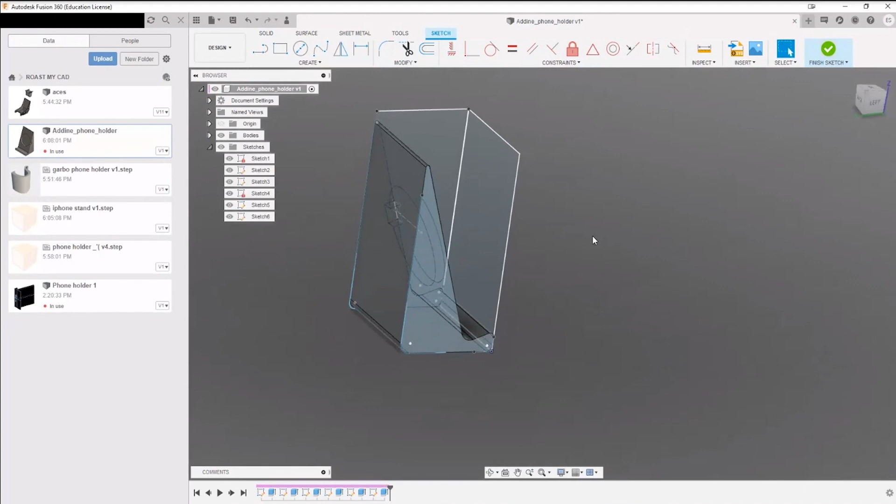Now, I'm not actually going to critique what the sketches are for, because everyone's got their own frame of reference and everything.

Right, well, this would be now, guys. Do you think where do you think we need to put a constraint if I'm able to move this one across? So we've got all the radii constrained. So there's two options I can see off the bat here.

Where do you think those would be? Anyone can just call it out. In fact, could probably see three.

The top one. So we could do something in this corner. No, the bottom by the angle. By the angle, this one, yeah. Yeah, yeah, okay, so yeah, there's one thing we can definitely do here. We can probably set this distance, right?

Actually, so we could probably set this distance.

This is probably a really stupid question, but what's the point of constraining stuff? Look how if I'm clicking this line and dragging it around, right? Obviously, I don't want this to happen.

Okay, so when you constrain it, you make sure that you can build out this entire sketch. If you were to draw it on a piece of paper, right? All the angles, all the radii, all of the lengths, such that you'll be able to construct this on a piece of paper.

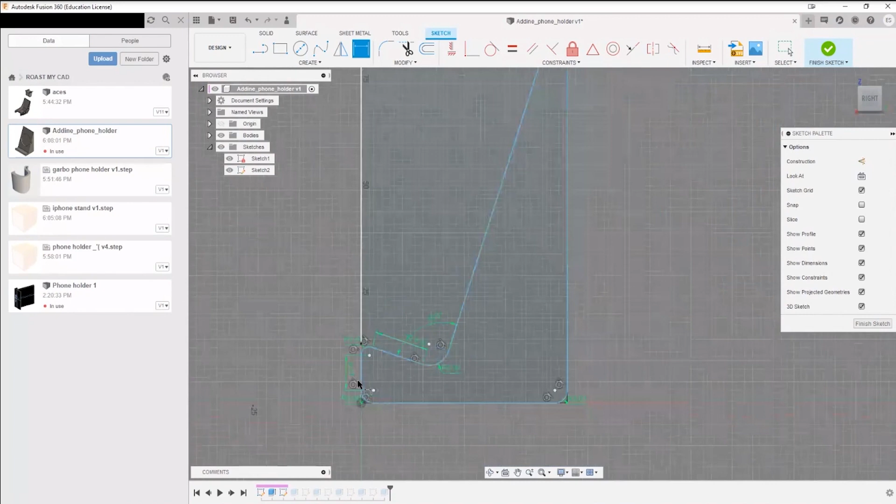So one thing that you would need to do is run constraints for these different points. Now, you want a height between these guys. All right, so that's no longer moving. See, so those constraints that need to be placed all over.

Now, this is one thing that I may have mentioned in the first or second session, is that adding fillets inside of the sketch, if you absolutely need to, do it. The thing is that it tends to remove any endpoints for lines.

So what I mean is, when Adine did this, he probably did something like this, and then something like this, and then he probably constrained it to the origin. So let's go from here to there. Yeah, that was the first point.

This was the second constraint. And then this was the third constraint, right? And then we can check. Oh, yeah, so this line's got to be coincident.

Switch on. Right, so it's got to be coincident or collinear with that point.

Yeah, see, now it's turned white. Now I cannot move it. So I'm clicking it, I'm moving it, it's not going anywhere.

So we know that this line is going to be collinear along this y-axis to this point over here. It's 84.818 away, 52, and then whatever this gibberish number is, okay?

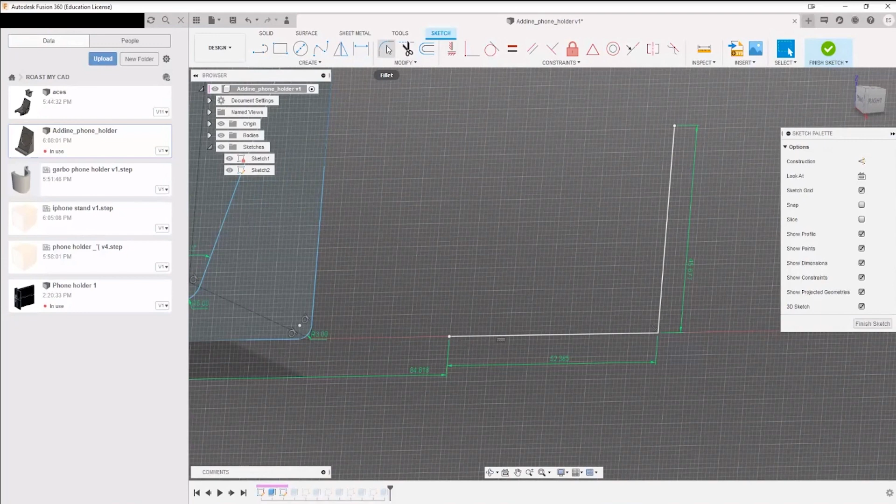So this is constraint. Now there's one little glitch, I wouldn't even say it's a glitch, it's just the way Fusion does things, right? If you go to fillet and select this corner, select 11 millimeters, if you hadn't constrained it previously, this wouldn't constrain either, right?

So one good way would be, okay, so we've got 3, 2, 3, and 1. What I would recommend is when doing a design like this, let's just say I'm going to delete that there. I'm just going to do these two corners. There's a neat little tool over here.

It's called extend. So if you go under modify, extend, what it's going to do is extend the same line. So you don't need to create a new line from this point. Because points do get taken into account, and if you start to extrude, it's going to create a whole mess of things.

So try to always have a single uninterrupted line going back and forth. Now I'm going to turn the bodies off here.

All right, so we've got these two things. Now there's another tool, it's called the trim tool, so you can remove the excess bits that you've extended. Okay, so now you've got these two.

You know this line is constrained. You know that we need to put an angle between these two. So a good way to go about it, I'm going to remove most of these angles here.

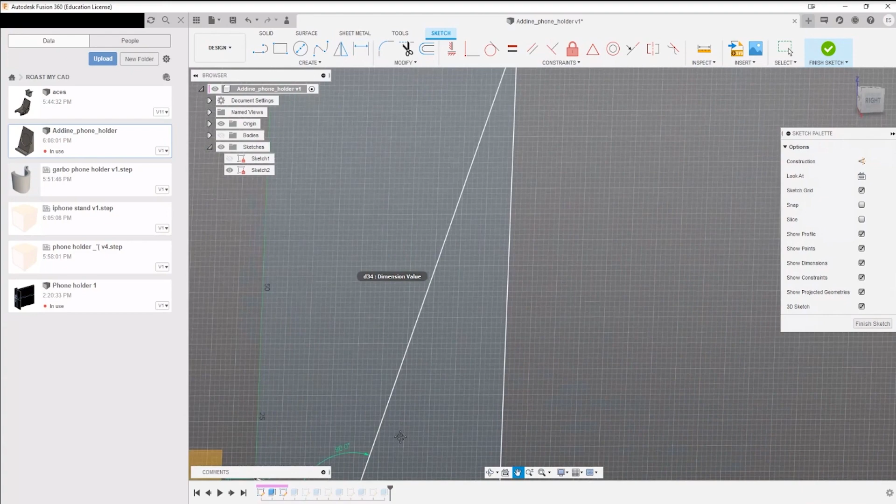Now, the reason why this is constrained is probably because there was a previous block that Adine made out here, which is taking it as reference. But if you didn't, your next step would have to be to create the constraints here around this angle, around this angle.

Now, once you've created these constraints, you can go around putting fillets already within the sketch. So make sure that your overall profile is all set out before you start putting the fillets.

Okay, we need to make that 1 millimeter. And I think that was 3 millimeters. No, that's 2, and then that's 2 there as well.

Okay, so that's all constrained, and now I can no longer move this part around. It's all nicely constrained, and you're not going to have any shifting issues.

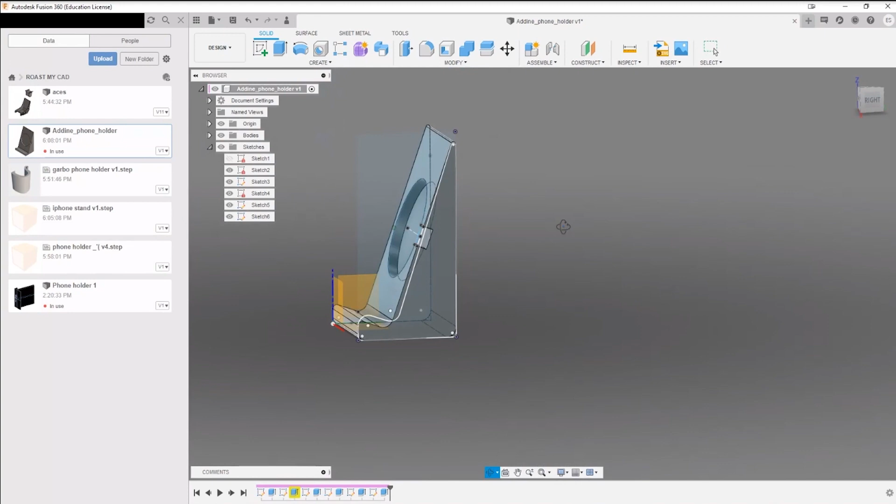So once we put this body back, what we can do is create a new block. So let's say, let's take the distance between there, so it's 50 mil and 60, 50 by 60.

And we'll actually use that point as a reference as well, so you can create references in between different sketches. So for example, if I've got everything constrained in this sketch, it's quite reliable, I can use that as a reference in another one that's right next to it.

Yeah, so we'll join that one up. Now, I can either cut through this one or just select the intersect Boolean here, and that's going to leave this shape. All right, so this is one approach.

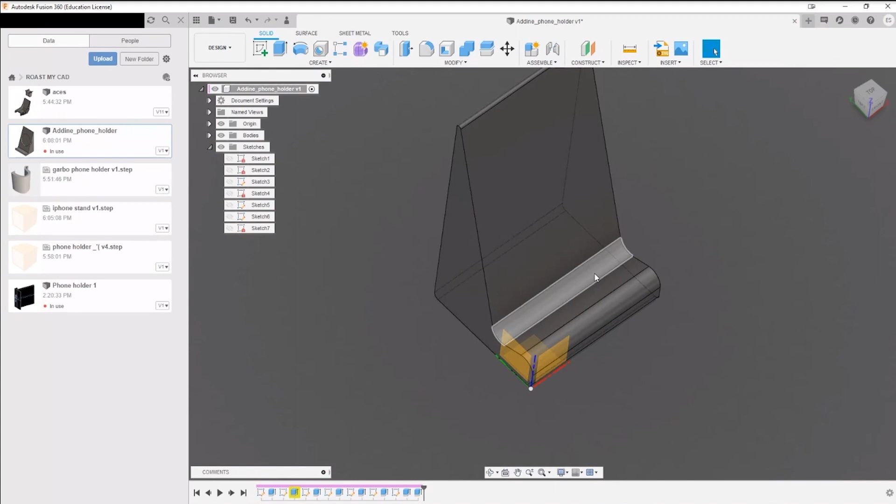Another approach would be to actually leave the sharp angles over here and then create the fillets using this tool instead. I find that in my workflow that tends to be faster and more applicable, but then again, to each their own, it depends on what you're doing. But I found that that also shows fairly good results.

Okay, now next thing you need to do, you wanted to create the circle. Now, again, this is one thing that you always need to pay attention to, constraining. So we've created a certain circle, but this circle isn't fixed in space, right?

If you're working with different people on the same project, chances are, or your hand might twitch or something, you might move this off. Maybe not that much, but an entire millimeter. But a millimeter is going to put it out of alignment with, say, another component that has to fit inside of it. So again, it's always good to find where the origin of this certain plane is.

We can say this is here, and then just marry that up to that particular component. Okay, now I know it's constrained. There's another way to do this. In fact, I'm going to remove these guys.

If you want it to be positioned in the middle of this cube, we know that this was 60 millimeters. Well, we're going to put that to 30, and then do is actually inspect, check that this is perfectly centered. Okay, so that's about, say, 90.

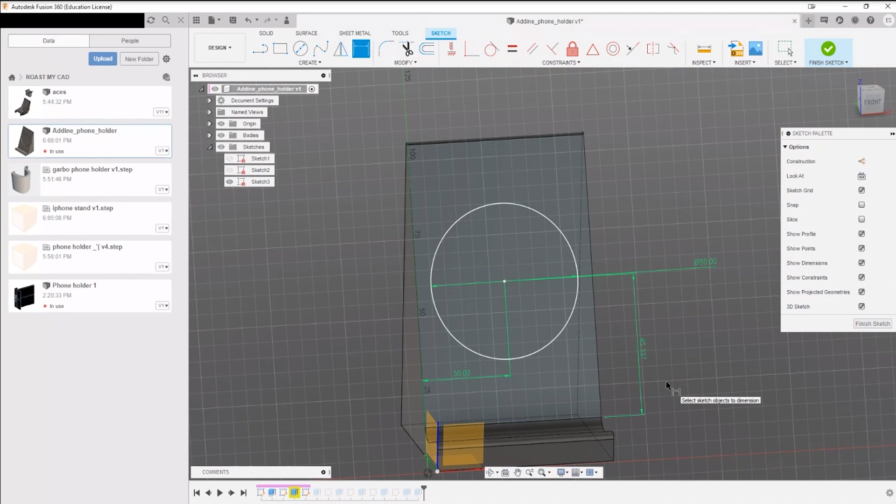If the circle needs to be at a particular height, you probably have calipers to measure against your phone. But say if you want it to be in the middle of this segment, between the fillet there and the start of the fillet there, this would be one way you can do it. Okay, there we are, so that's perfectly centered.

Finish that sketch. That's constrained, so that's not going anywhere. And then we can cut in like this.

Wonderful. Now the same situation is going to happen over here. You probably have a sketch. No? Okay, you don't have a sketch for an opening. So to create this opening there's two ways. You can either create a square and another line and use that to sweep it through, or you can just create another sketch on this surface, line it up.

This line segment probably has a midpoint somewhere, and this is what CAD is very good for in terms of computing it, so it'll find that midpoint. So you can draw that 90-degree line. That can be your construction line. You know that this is 5 millimeters deep.

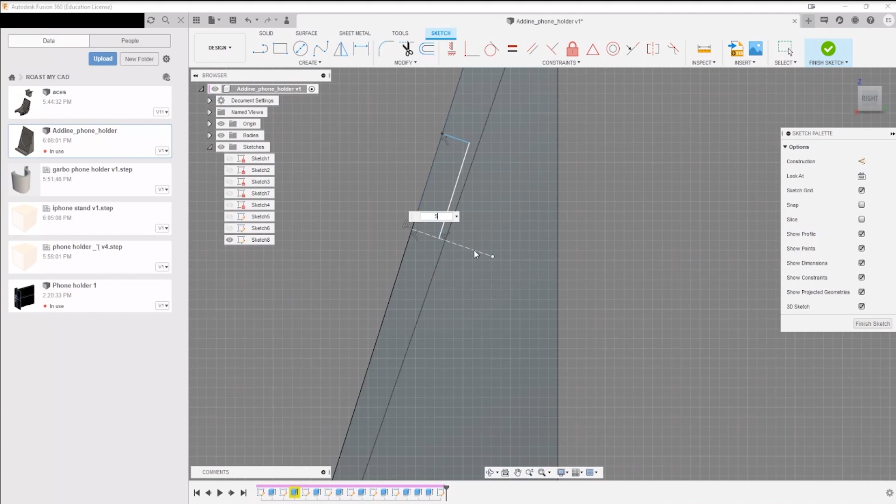So you can do something like this, and then set the distance of this line to the surface. Okay, we set it to 5 mil there.

So now we want to make this opening a little bit larger. Rather than copying - I mean you can draw this out again, but there's an easier way to do it, and that's just to mirror it across. So select the objects that you want to mirror over here, select the line, and that's all done.

A quick way to get rid of the feature - you can just delete that. Create a new sketch plane.

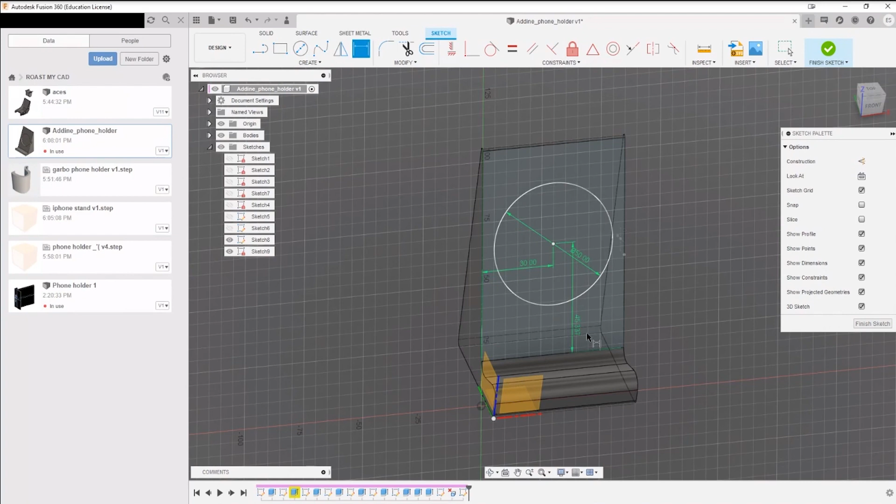I believe that was about 60 mil, and we're going to do the same thing. That was the old measurements, divided by 2. Okay, that's all constrained.

Brilliant, all right, and now we can just cut into there, and we've got the same result.

If we're 3D printing, obviously based off last session, there's 2 ways we could print it. You can happily print it standing up the way it is, or you can turn it on its side, like this. So most of you, what would you choose, which orientation, and why?

Can you tell me? Just shout it out. Cut out upwards on its back. Yeah, cut out upwards on its back. Any reason why you would want to do it that way? Because you haven't got any overhang otherwise, apart from maybe the little lip on the bottom to hold the phone. Yeah, absolutely. So one way you could do this.

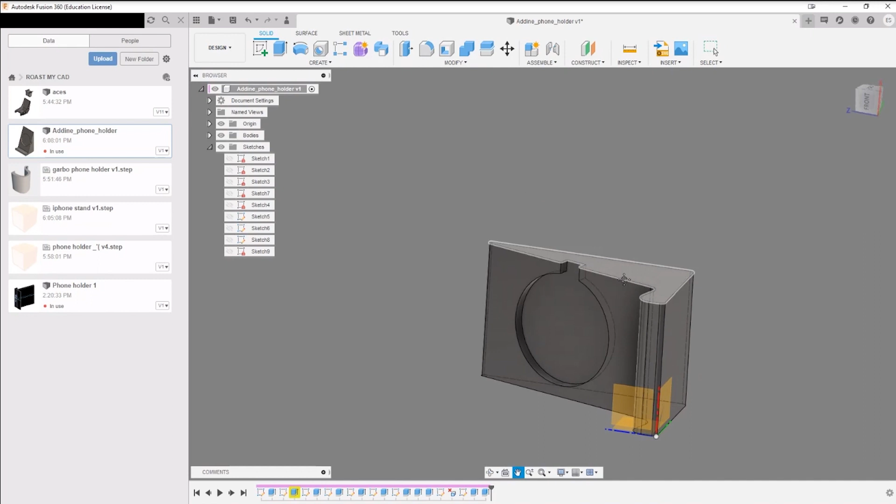So one way you could do this is put it on its side like this. If you actually throw this into Cura, the first layer that's going to go down will go down quite quickly. You've got a lot more stiffness, because if anything this thing's going to be bending around this axis, right? So you want this to be an entire singular shape.

You're going to get much sharper corners over here because the extruder is going to have effectively no layer height resolution limit in this case, in the XY plane on the print bed. So it'll make these corners quite sharp as well. So those will turn out quite nicely.

And like Robert said, you don't have any overhangs over here. So it's effectively skipping this keystone region. Just to say, I meant the main back, the big surface. Oh, that way the entire cut out is facing upwards.

Oh, so you want to do it like this as well? Yeah, that could be one way. In fact, the printer will handle a slight overhang like this. So that could be another way of doing it.

So again, this is quite a robust shape. You can do it in most ways - some ways it'll go a little faster, others a little slower. But it's really up to you in terms of where you want the stresses to go.

All right, what do you give it out of 10? Well, the balance looks off. That's my main concern - like, you put the phone on, it looks like it's going to fall over backwards.

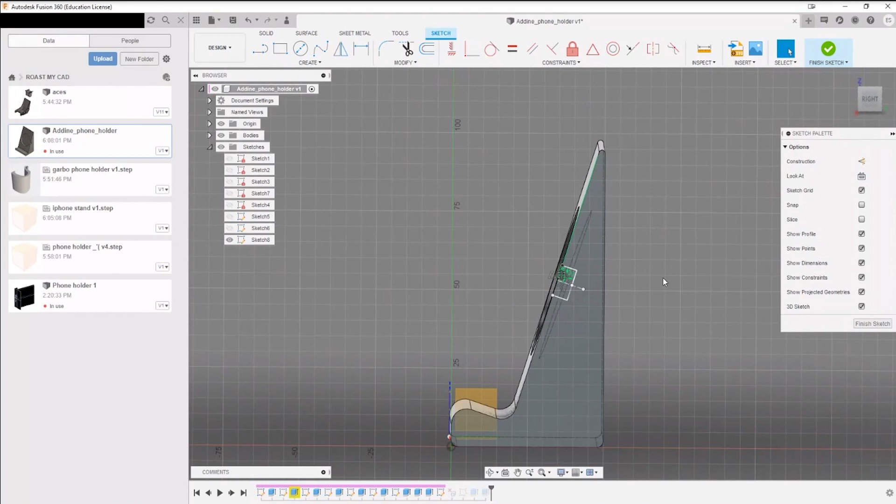I'd argue that's okay, but you have to keep in mind it's going to be printed out of PLA, and modern phones are heavy. It's top-heavy, it's got a high center of gravity, but it's got enough base down, it should be okay. Yeah, but if anything, it needs to be a little bit taller and a little bit further out. Engineering 101.

How do you establish if this is more likely to tip? It's a little clue - this has to do with center of gravity. You want the centers of gravity to align. So the center of gravity of the phone is probably somewhere here, depending on how long your iPhone is - probably 13, 14, 15 centimeters, so about 6 or 7 centimeters up.

Yeah, this is 86, so chances are the center of gravity is here. So the center of mass for this product would have to be somewhere, as far back as possible, so it's not as easy to tip over.

Now, one thing we can do is check the center of mass on this object - okay, center of mass is way down here. Do you think this would be at risk of tipping over? Because effectively your rotation point is going to be about the center of mass for this. Well, yeah, because the majority of the weight of the phone is past the halfway point, and then it's past the center of mass as well.

All right, we've got a lot of designs to rate. I'm going to try to go quickly through the other ones. Will we give this a 7, 6.5, 7? I could agree with 6 for that - lack of creativity.

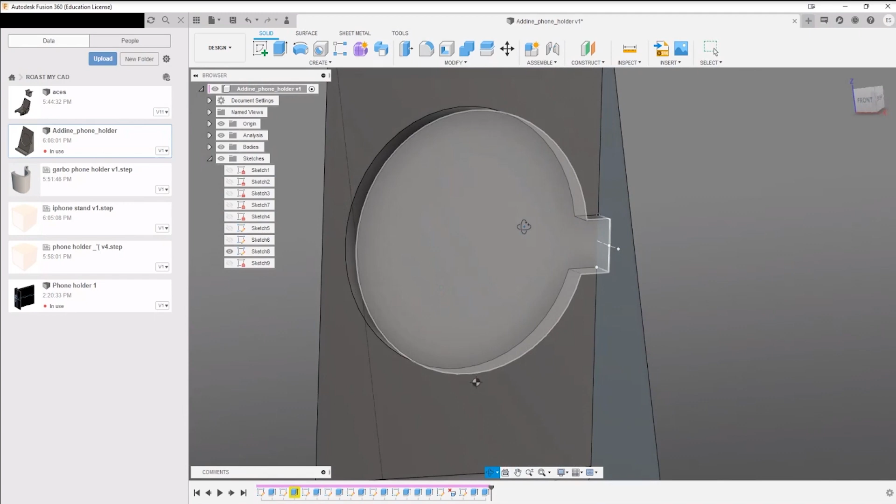All right, I'm happy with that. There's one other thing I probably missed - this gap needs to be directly in the center. So I'm going to use this as a little learning opportunity on how you can use one sketch to reference another. I'm going to remove this one real quick, and you can actually remove it too. What's up? Okay, wait, for creativity, right?

So if I switch off the body, this is constrained in space - it's not going to go anywhere, but you can use it to reference it. This becomes very, very useful as you go along. So as I mentioned in the first session, do have a look at these features - they'll allow you to do some really insane stuff in CAD. I'll even show you later, you can effectively create an entire underground tube system in terms of projections using that method. I'll show you in a minute what I mean.

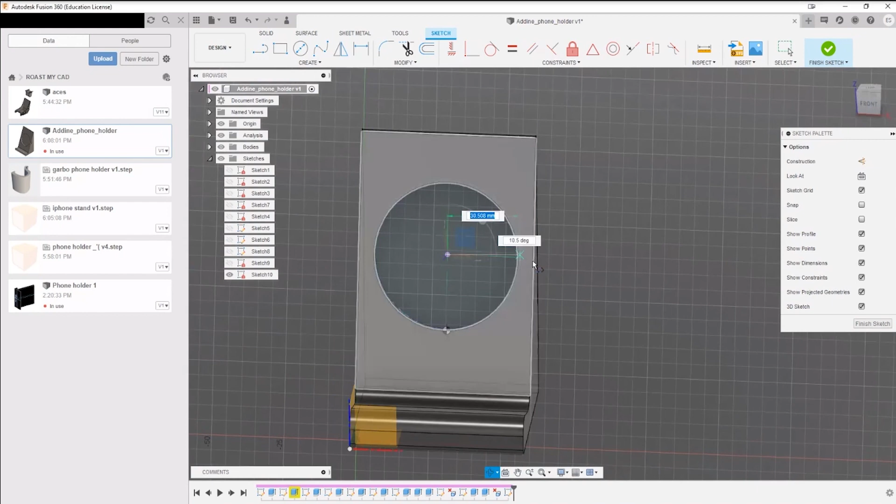So once you've selected that, just create a line out just along here, and we'll turn that into a construction line. Now you can go even crazier with this - actually, no, we'll keep it at that.

So once you've done that and create a new sketch, you can use project again and include this line. Now, because this line intersects this plane, it's going to leave a point, okay - a point which you can reference to create a third construction line, perfectly aligned with the center of that circle. Now you can go ahead and find other ways to do this.

This is just the first thing that came to the top of my head to describe these functions, but it shows you how useful it is, and once you get more complex shapes, how you can navigate using different planes and axes to get to where you need to be to make a second sketch.

We'll go with 7. Mirror that across - where's it gone?

Okay, punch that through. Now that's centered. All right, cool. So 6.5, 7. Bonus points for creativity and for multi-component ones. I mentioned this in the last one, but other than that, looks good. That's pretty sound, that'll print well.

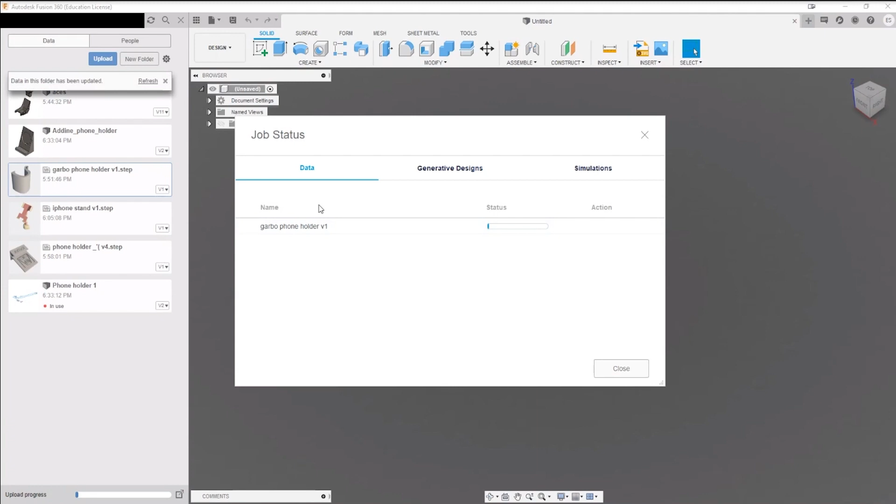That's painful, you're gonna wait a while to see my amazing, beautiful work. All right, so you've gotten it to work. Oh sweet, okay, that one's opened up as well apparently. Oh no.

Okay, create fusion things. Oh right, okay, this is what I've literally just generated, a fusion design from this.

Now this is going to be quite cool, because you'll see how you're able to work with step files and how much you can interact with them. I don't see your sketches, but I think right now, off Dean's example, I've been able to get across the importance of constraining your sketches and making sure they don't shift around, and what happens when they're unconstrained. You see the lines, they just go all over the place, and that's going to create problems down the road for your design. So everyone's got that, we're not going to cover that anymore. Now we're just going to look at the actual design.

Right, so definitely I can see extensive use of splines here. I do have one question: which way is up? Is it meant to be like this, and then the phone sits in there? Yes, okay, wonderful.

All right, two holes, that's for cabling. Yeah, for cabling, or if you're not putting your phone there, it's just like a cute little elephant, or it should be, like. I see what you're going for.

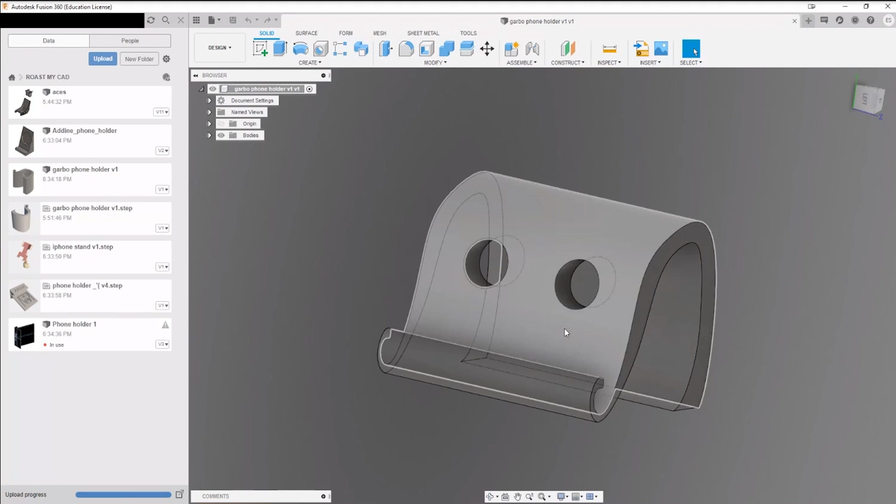But we'll see how it stacks up against dimensioning. The width and depth of the trunk where the phone sits, has that been measured and calculated to hold a phone, or is it just eyeballed? No, an offset should have been used, it's just eyeballed. I was just relearning all of this stuff earlier today, so quick learning.

Awesome, all right, okay so I see 140 millimeters, so I'm guessing the phone sits sideways in here. Yeah, okay, all right, very nice. We're not multi-component, so I'm gonna have to slash you on that one. Fine, yeah.

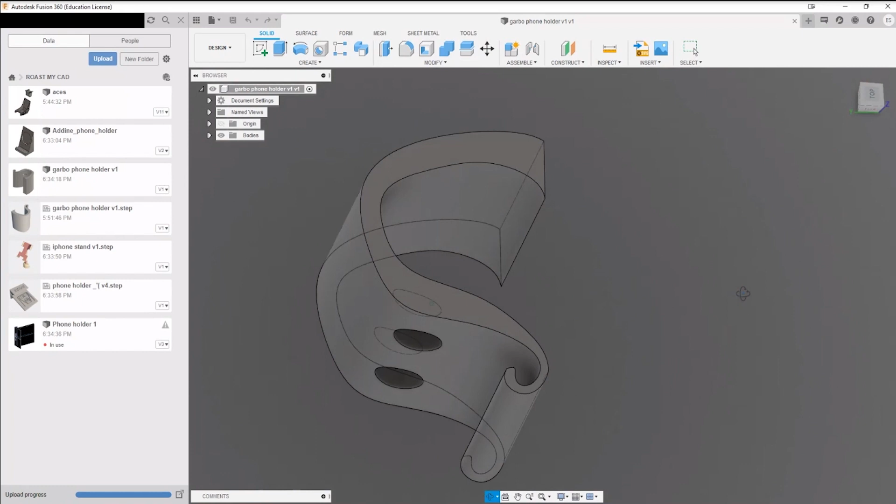Right now, in terms of printing, which way would you print this? The way that's kind of with the trunk on the side, like that, just on its side. Yeah, okay, so these circles, the printer would normally do that. You might get some rough edges up here on the slight patch, but generally it'll be able to do that. That's not a problem.

The only qualm I would have maybe is this corner for printing. So this edge, because it's technically going down to an infinitely small point, this is where I'll show you how you can interact with step files. You can create a fillet, you can select the size, and we can go, say, 1 millimeter, and it will do that. Now, when you're working with step files, you'll see it might create a few artifacts.

See that bit right there? That little corner? So if you actually see something weird sticking out, ignore it. Just turn the other way, don't listen to Ben.

If it looks weird, it probably is. Okay, so let's see what we can do about it. Control Z, undo—it exists for a reason. So you can try actually deleting it and seeing what happens.

Oh right, okay, so that's been resurfaced. That's no longer a problem. Might have been a glitch, but it's gotten rid of that corner.

If we try to go and delete that edge again—no, it doesn't let you delete it. Okay, so actually it gave me a warning, can't delete individual faces. So apparently this was a second face that was created on top.

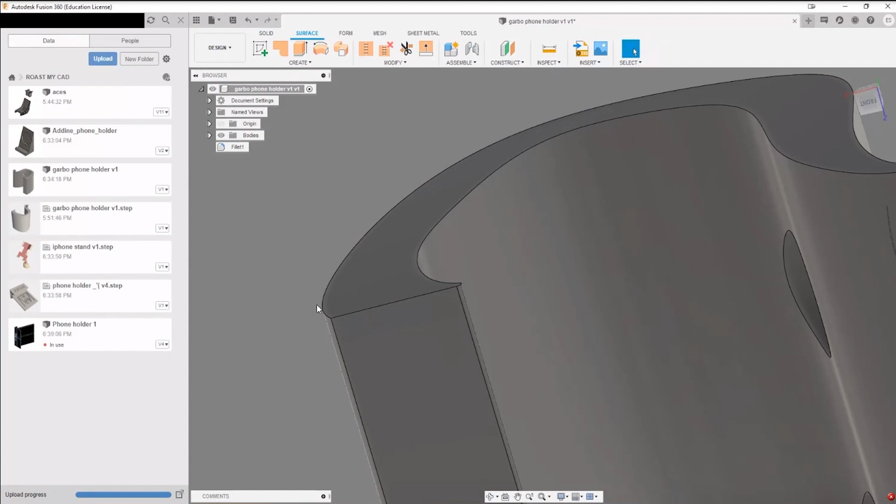I'm guessing because of the way that was done—were you using the surface form? Yeah, and then stitch it? Yeah, okay cool. So it seems you've created two surfaces: you've stitched one onto the rest of the body, and one was left overlaid. That's why we got the edge—it was literally lying on top here with a corner out. So we just removed that duplicate edge.

Maybe it's worth trying to see if there's a second one. Ah, no, all right, okay.

Sorry, one second—I know we skipped past this, but Pavel is trying to get his design in. What's the method if he can't do it? Tell him—is he watching now? Pavel, are you watching? Yeah.

All right, so go to File, go to Export, and for the type of file, click the dropdown and select Step—just this one. Select Step, then select your directory, wherever you want it to download to. I'll put it in my Downloads folder and select Export.

Once you've done that, go to your Fusion client. You would have seen if you've been added to Roast My CAD. If it shows up in the web client, hit Upload and drop it there. If it doesn't work that way, just drop it into the chat and I'll upload it myself, since I think you said the upload was whited out. Just make sure you export it as a step file.

Yep, okay cool. All right, so you create the surfaces—are these stitched together? Yeah, these are stitched together. All right, cool. Guys, what should we give it?

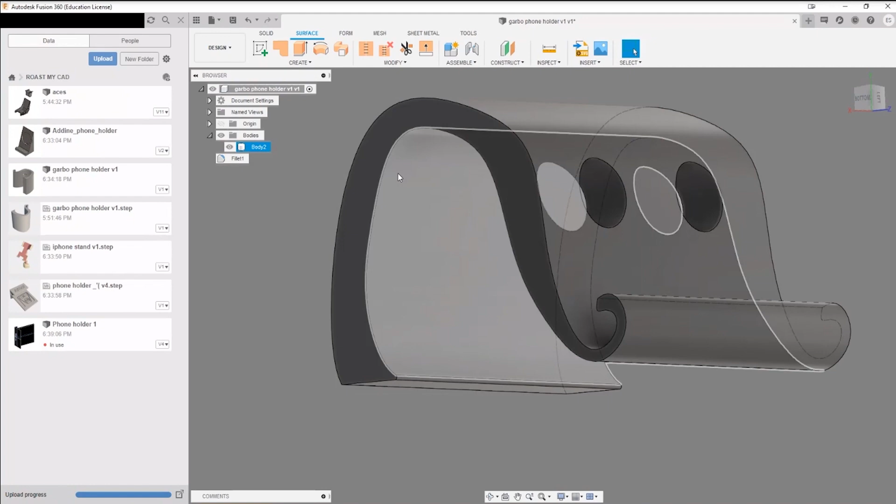Since we gave Addine's a 6.5 and a 7, we'll go with 7.5 for creativity and technical. Definitely nice job working with surfaces and figuring that out—it's not multi-component, but it's multi-method. Should we give that an 8? Yeah, good use of curves as well—stops warping when printing because you've got no right angles. I think an offset would have made that look a little neater, but otherwise yeah, we'll go with 8 on this one.

Thank you, all right, no worries. We'll say that. Right, let's go. Someone is typing furiously on the laptop.

Now I might need to adjust the scaling—I might need to put this out of 15 instead of out of 10 if there's exceptional ones coming up. So we're going to change the scaling as we go. Out of 12. It's moving out of 12.

Okay, so 10 is fully met expectations, and anything above that is exceeded expectations. I think you have done a 110% job—top scale.

Apparently in the military, when they assess you, it's on a scale of 1 out of 5, and 1 just means you're doing your job. That makes sense—why would you want to be below? It makes sense, but imagine just being an average student, it's like being a straight C student.

Avatar fan. Right, this is impressive. Yeah, a little bit of Avatar. Okay, yeah, I like this one.

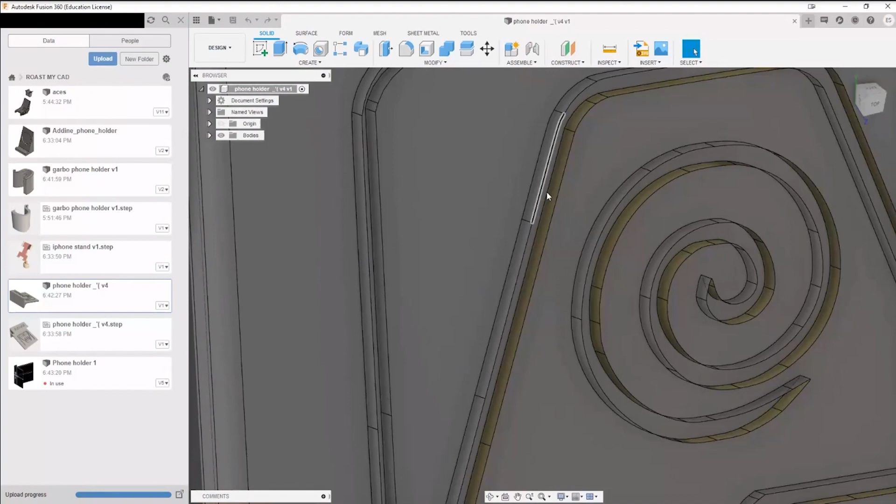Yeah, very trim. My only design concern would be maybe making this foot a bit longer, but good use of fillets—the print extruder is going to go around that quite easily. My only concern for printing here would be this is technically infinitely small and infinitely thin.

What's it called? Yeah, infinitely small plane. So right now we're going to see how to fix that.

So technically, this is right up there. You've done everything right with the lettering. The lettering's good. Can I just add, how are you planning to print this one?

Nah, I'm gonna be honest, I don't know how everyone was saying that. Everyone just kept on saying on the side, so I'm just gonna guess on the side. I mean, it's the only flat surface that would avoid using support. But then you're going to have problems with the letters, the text or the shapes.

So I suppose straight up might work. It's beautiful, okay, depending on- not sure if it's printable. But what's the workaround around that?

Okay, sure, you might not be able to print it, or you might need to put support here. And generally, I try to avoid using supports because they tend to extend your print time. They mess up, sometimes they fall over, and then they leave waste material. They're an absolute pain to get off, and they leave a rough edge on the bottom here. So this is going to be all mangled at the bottom. That's just how it runs.

So what would be the workaround for this? Have the front as a modular piece, so you can then screw in different parts for bigger phones or smaller phones as well. No, you can do that. Okay, but someone else apart from Rob. Can you tell Rob?

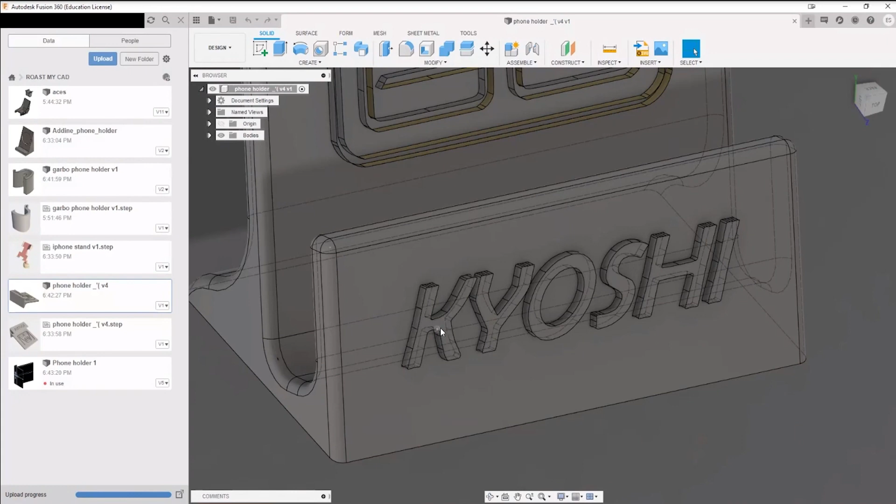This was probably from the first or second session, and actually in this particular case the solution is so easy, and you can 3D print it as well. Just not in the obvious sense.

Well, you can turn this into a multi-component. So technically, let's go with, we can split the body. Use that as the splitting face. Do that, and now you've got... so now you've got the letters separately.

So what you can do is you can print the letters separately. V is the hotkey for visibility, and you can print this separately, and you can actually glue these guys on. So you could print the lettering on their back, so the extruder will be running top to bottom like this. You'll get very, very neat letters. You won't need any supports, like in the S or the O, to create a floating piece, which actually, once I get to Luke's design, you'll see what I mean.

You won't get any of these floaty bits, and then you can just happily glue it on. Like I said, nothing needs to be printed as one single monolith piece, if you could figure out a way to assemble it properly. So that's always worth keeping in mind.

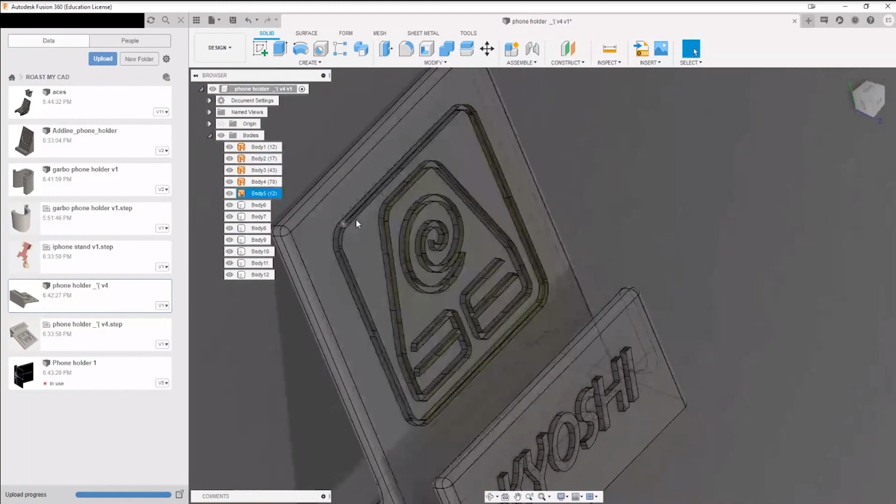Now that we've got this bit over here, we need to fix this extrusion. I believe you've gotten the line extruded and everything, but you need to make sure that this is an actual 3D volume that's being protruded out, because right now this is just infinitely thin. So a workaround to this one might be...

Okay, while we're at it, how to create groups. Right click on body, select create group, you can highlight all of these letters and then just drag and drop into there.

So what we're going to try to do is extend all of these surfaces, all of these edges. We're going to extend it into this body, and then we're going to cut and extend.

Actually, no, that will be the second method. The first method, we'll try to patch it over. So we'll create the patch tool, we create this volume. Perfect- no, that's not actually what we... no, okay, so it's not creating... all right, we'll move on to method number 2, since it'll be a bit faster.

I'm really appreciating the fan support for Avatar out here. Thank you.

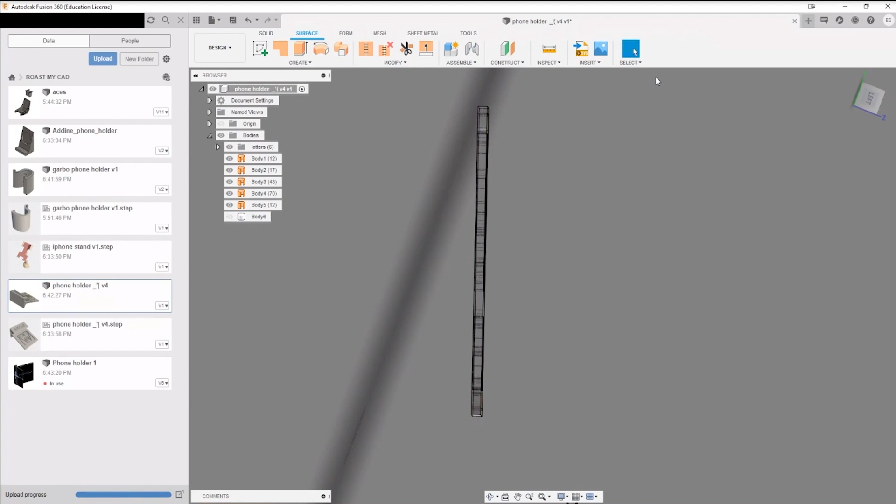All right, we'll just line this up so we can just select the... okay, so if you want to just select edges, there's the selection tool. You go to selection priority and select edge priority, and that's only going to select edges. All right, so that's...

While Ed's doing this, how did you actually design this? Did you just draw it out by hand, or did you import something? I imported it - I used the insert function and it came in as an SVG. It was hard since it all came as little separate pieces when I did that.

I'll give you extra points for actually going out and figuring out the functions, because that's pretty much the only way you can get around learning CAD. I thought this was drawn manually - I was amazed. Whoa, that's hard, I was trying to draw.

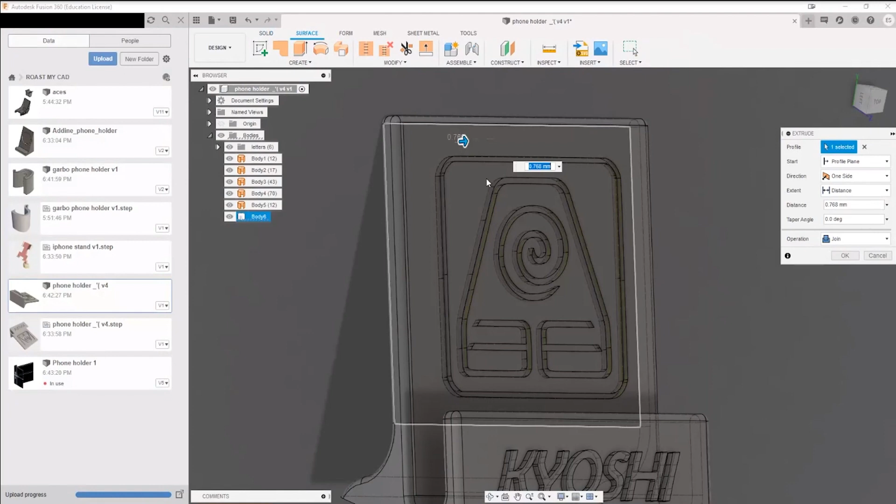Right, this is being a slight pain. What we can do is we're going to join all of that up. Now, if we...

What's going on, Ed? Well, what I'm trying to do is use these guys to split the face on this and then extrude it out so that we can close it up and actually make it printable. Because right now the issue is that this is a 2D plane. So what we're trying to do is select this and then select

the surface as a splitting tool, so it should create almost like a split line. It says no intersections between target and splitting tool, which is odd, unless you've got gaps somewhere. But this is going to be an interesting one because it'll show you how to troubleshoot - since it's one surface, technically it's a closed profile, so we shouldn't be getting issues like this.

We're going to run through a really good troubleshoot, because once you get dodgy models, you'll know how to debug them. Okay, what's the next thing we can try? Under inspect, there's a validate function.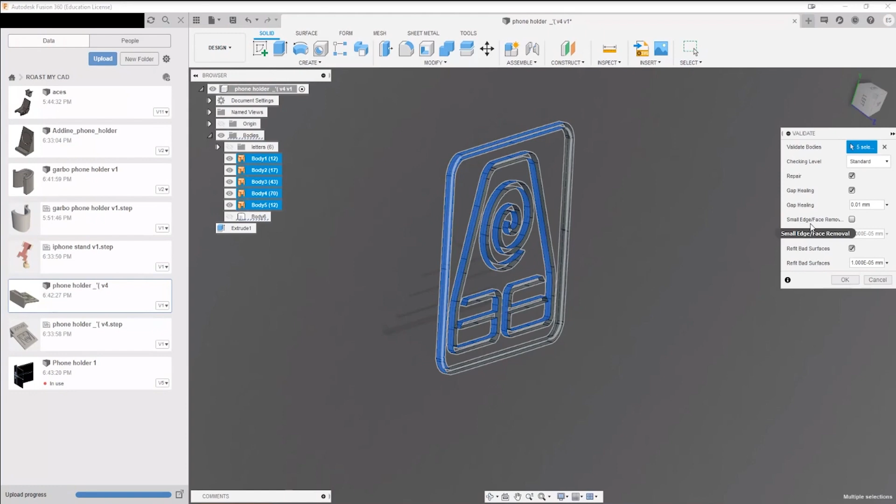So what it's going to do is check whether you've got any gaps - refit bad surfaces, small edge removal. Yeah, we can do that. Okay, that's sound, that's fine. We'll try that again now.

There's another split face option. So what we can do is we can actually split that face. Okay yeah, that's going to work.

Yeah, Dean, you're the one to blame for this. I'm going to have a whale of a time editing this out.

Two objects, so we're going to move that.

Just while Ed's doing this, who's made the phone stand and coloured it? I'm just seeing lots of names. That would be me, Danielle.

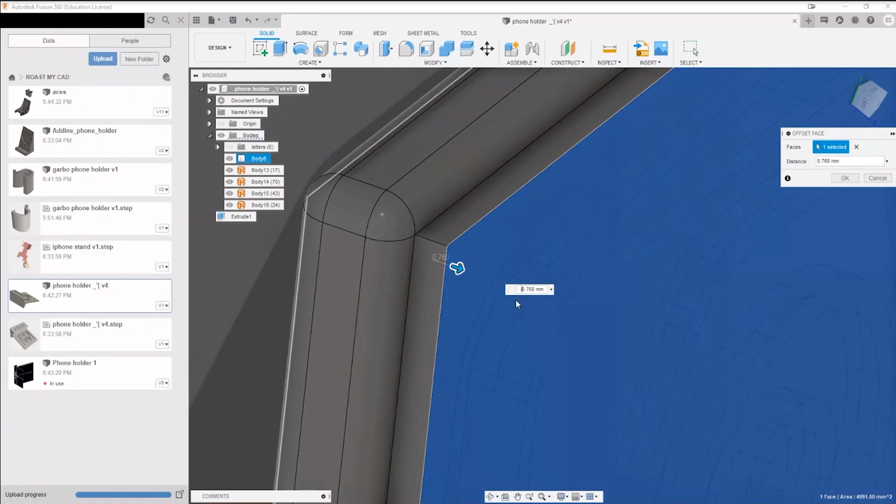I'm liking the use of appearance on that. Guess who inspired me? What inspired you, have a good look at it, try and guess. The problem is it's so small. Is it a windscreen mount, like for a sat nav? The colour scheme, I don't know - I just see brick coloured.

All right, let's make sure that Rob never goes into interior design.

Oh dear, right, so this is proving to be a challenge. You have challenged me with this - are you challenging me? If it makes you feel better, yeah, this was really hard for me to make. So this is redemption, right? Okay, so I feel less bad now.

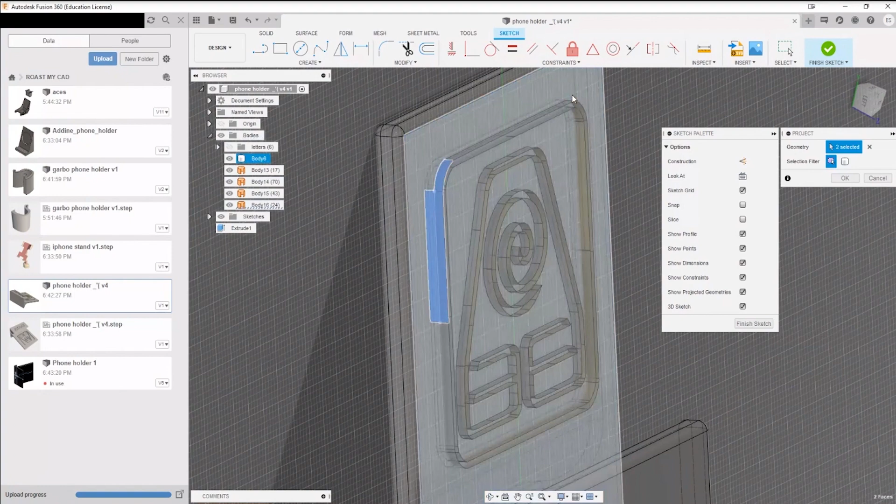So what we've tried here is to go into surface, and we're going to see if we can actually split the surface using this shape. We're going to create a sketch, using my favorite project tool - we can go project to surface. Actually no, we're just going to use the project tool, and what that's going to do is create a whole new surface around it. So let's just get rid of that body there.

You're going to find in CAD there's a lot of clicking - if you screw up, there's going to be a lot of clicking for you to get around this, but we'll get there, that's fine. In fact, what we're going to do is select the priority, selection filters, select all, click face priority, so this will go a little bit faster.

Can't you just do a click drag highlight? Yeah, unfortunately it's not letting me do that. Is it? No, it's not. You have to get the whole thing. No, I've tried to get the whole thing. All right, select all. There we go. No, for some reason it's not doing that.

All right, so we've finished that sketch, and then we can go back into the sketch and continue on with projecting the rest of the stuff in.

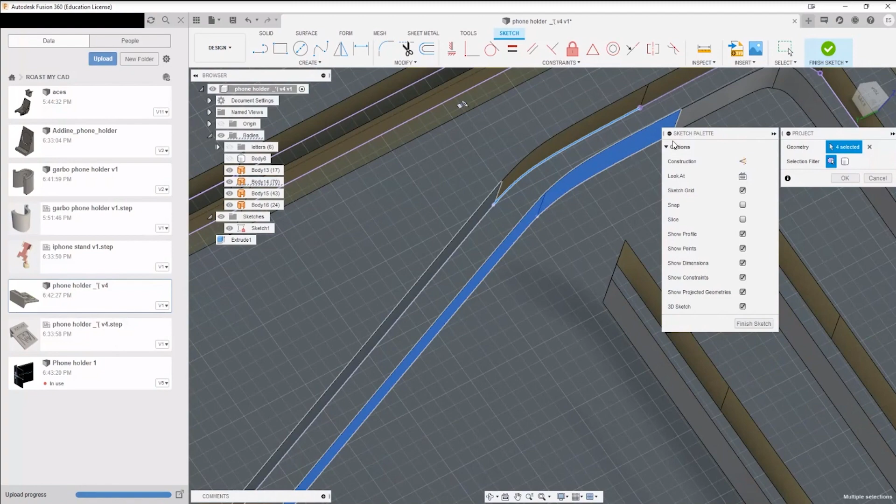Can you just select it from the menu, the browser menu, and highlight everything, like the bodies on your left? No, unfortunately you can't do that, because you need to select the individual elements, since a body is all of the elements put together. So we're talking about every single edge. Oh, I wish there was a shortcut for it.

We can try doing this again. No, let's run it. Create project. All right, I know this will definitely work once it's a closed profile, and you'll be able to just extrude that thing right out.

Can I ask, while Ed's going around clicking on every single face of the design, who's already made their mind up on what project they might be joining later? I'm pretty sure I might go into medical. Or does anyone have any questions about the projects while I'm here and distracting people?

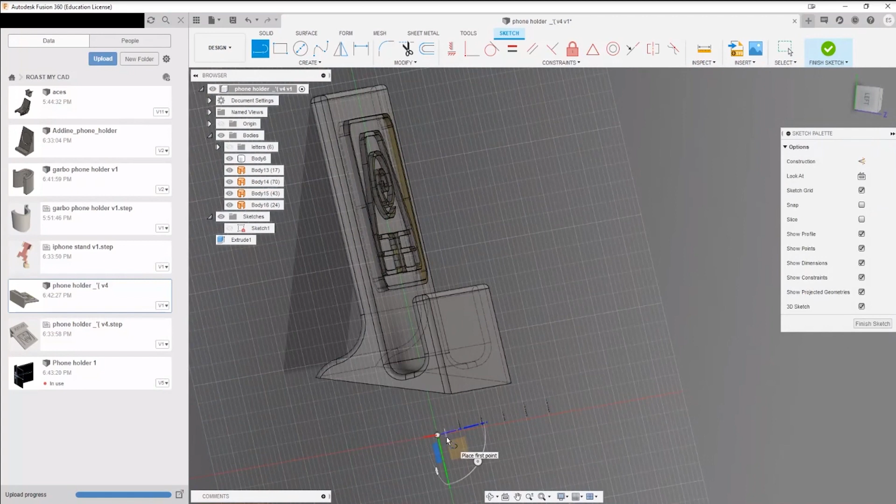Sorry, I can't really hear someone. I can't hear either. You're a jester for now then. Yeah, I'll just entertain. The best part is once I get fed up I can just save it and then start reprojecting again, so I don't suddenly click out and lose all the progress. Quick save, yeah honestly. Right.

But let's, I mean, we can extrude that thing out. How much was it supposed to be? Let's go 1.5 mil, that's fine. Doesn't it go in, not out? I mean, yeah, it depends which way, you can go both ways. We'll go out this time.

But that's not the point. I think once you can get this from projection to extrusion, you can do whatever you want with it. So the most important thing is to translate it from just being a surface into something where the body can exist, well, in the volumetric format.

Okay. Did I just switch on a section analysis on that? Oops.

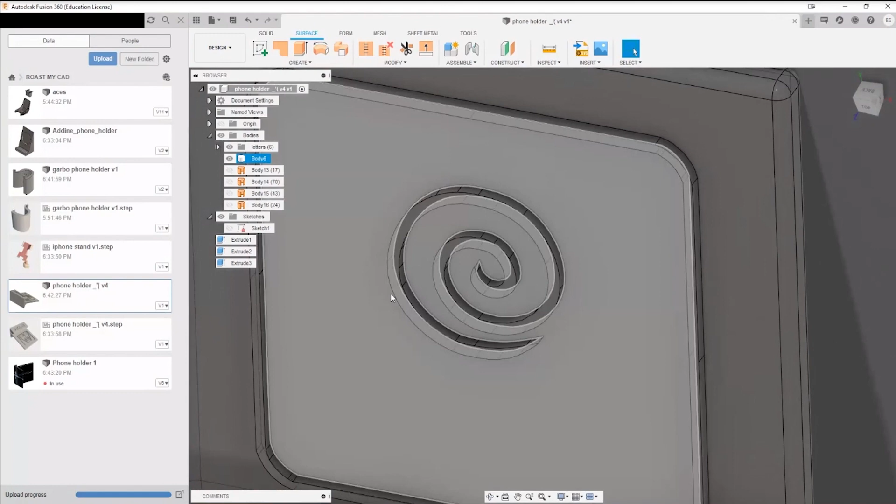Now, just for those who didn't get the gist, what happened was that—let's go with this surface, yeah. So what you see over here, this is an infinitely small 2D plane. You can see that, yeah. So even if I hit that, it only gives me a length, it doesn't even give me a thickness. And this was done using the surface form, okay, not the solid form. So what's going to happen is that it won't print, okay, it's paper thin, infinitely thin.

Now what I was doing is trying to translate this paper thin surface to something that can be extruded out, very much like this little embossed logo over here, or like the letters, right? You see they're sticking out. So one way to do that was to create a sketch.

You go into Edit Sketch, and what you do is go to Create, Project, and select the geometry that's going to be projected into the sketch, right? So you can hit a few of these lines, hit OK. If we turn that off, you see it creates these lines. Now what I've done is created a closed profile somewhere over here, like this round square and the swirly thing, and then you can use the extrude function to extrude it out, and it's actually part of the body.

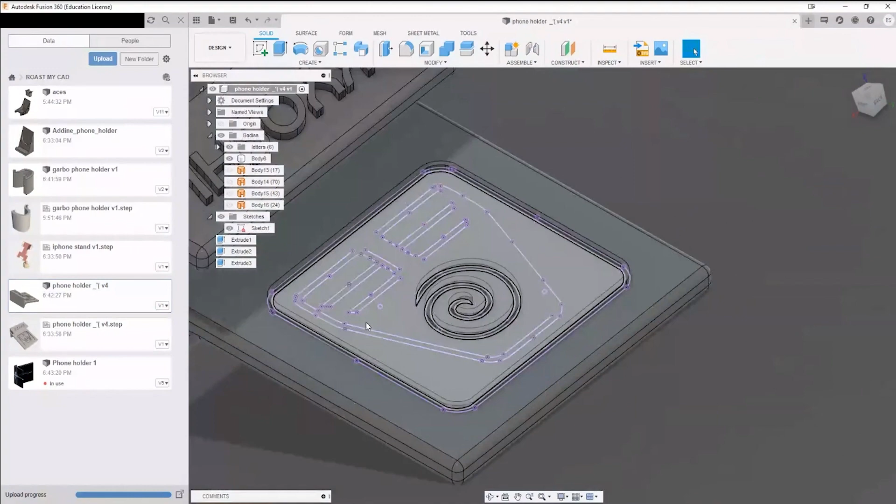All right, okay, so I'll save that. Now you know exactly how to translate it from 2D to a 3D surface in case you end up in a situation like that. Right, moving on.

Let's go to—I keep forgetting it's not. Need to create a fusion design. I'll create, we're gonna go to Luke's over here.

Yeah, literally the skeleton. All right, Luke, you're up next.

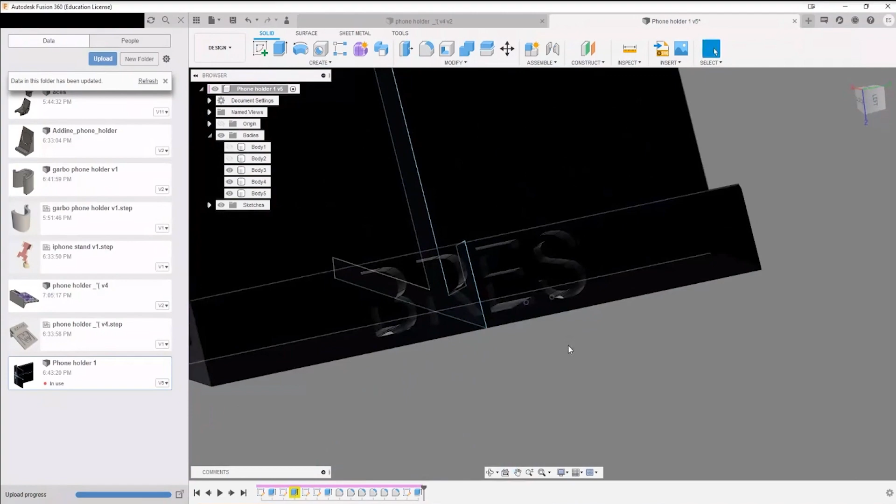I thought, well, how are they connected? Colored. Yeah, that's right. Well, how would you get the phone in there? Ah, right, no, you almost got me. You almost got me, right. So Luke has not figured out levitation. Damn it.

Okay, and there's a few artifacts over here, so it definitely needs a lot of debugging. I'm not sure. Ooh, yeah, definitely messy. Yeah, this is unforgivable. I'm sorry, man, I'm going to have to give you a 5 for this.

No problem. Right, right, the phone can't really sit in there either, can it? Because the letters get in the way of where the phone would be, right? Yeah, I'm thinking that, yeah, this groove, I'm guessing this is for the cable, but charger. Yeah, but this would need to be... If you hit Q as a hotkey, you can press pull that out, but I think it's bugged out to the point where it's not even.

Structurally speaking, the sharp angles, especially at the base where the back of the phone would be resting, that's not great either because it could break more easily. Unless you print on the sides and use the material's inherent strength. You're printing it upwards, that's not going to work.

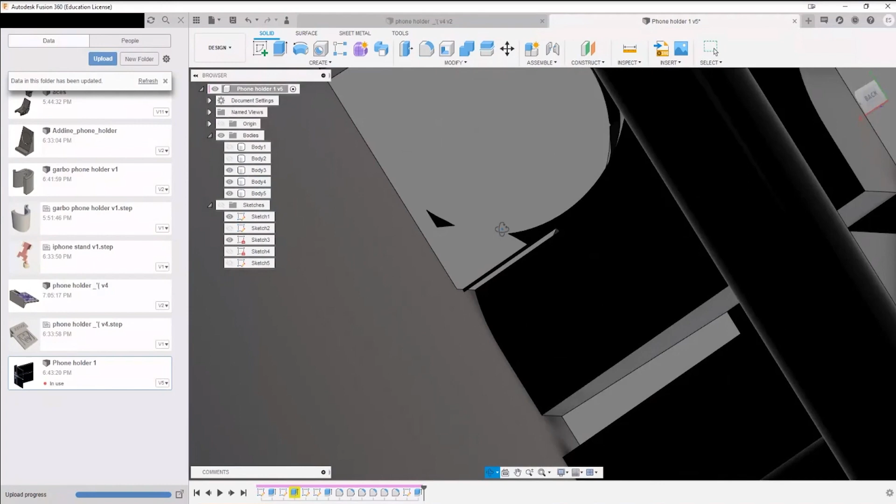Okay, so how can we improve this? Start again, do we get another take at this? I'm sorry, you get another take. I mean, stuff like this, you should have observed. But like I said, we're not going to bollock anyone for this stuff, this is all quite obvious.

So we're going to go and debug the technical bits, right? So if you want to create lettering, to start with, it would have probably been worth making the lettering go through only the front step of this bit. Oh wait, yeah, I know what you meant. I did it, yeah. So between here and here, well, here and here, yeah.

So, to leave some material, obviously, if you're going to create an opening for the charger port, it will be closer to this backrest, right here, or maybe leave a bit of material near this edge and a bit on this edge, and make it centered, just large enough for that cable to fit in. This needs to be larger because your cable, unless you have a 90-degree cable or some special one, your actual cord is going to be bent all the way down here, right?

So you won't be able to stand this up. So what I'm going to do is move these guys into here, and I'm going to do a quick little sketch based off your design. So let's go.

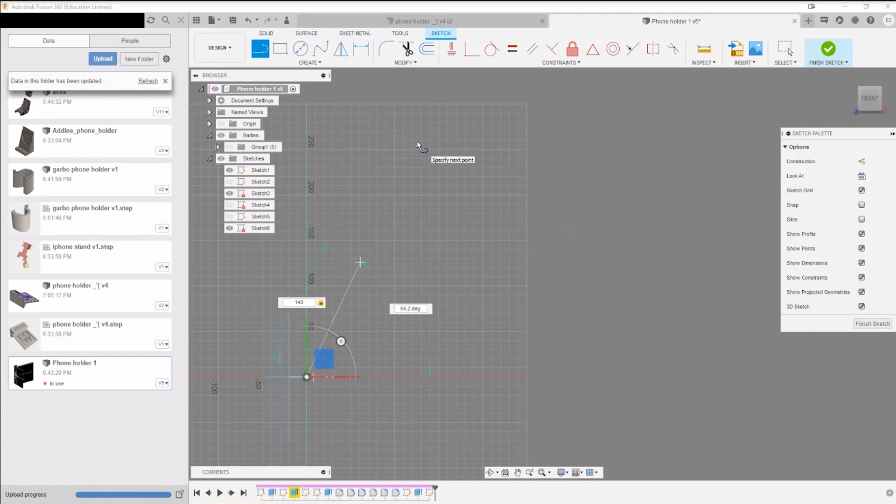Okay, so we go 140 mil up, and then depending on, let's pick an angle, let's go with 60, that just seems right.

Yeah, okay. Now, obviously, there's going to be a bit of overlap, so we're going to go to 150 mil. Actually, you know what?

Now, for 3D printing, 5 millimeters, depending on which orientation you're printing in. Let me just refresh that real quick. Oh cool, oh Pavel, you've managed to get it through. Nice, let me know how you did it after. I uploaded it in the chat, it's somewhere there before the meme. Okay.

Right, so we'll go with 5 mil, but technically, for PLA, if you go with 3 mil and actually print it in this plane, so on its side rather than standing up, 3 millimeter wall thickness is more than enough, it'll be very, very strong.

Right, so we'll put this line out here. Now, obviously, this needs to be constrained to this line, so we'll go around about there. We'll hit that trim button and get rid of the excess.

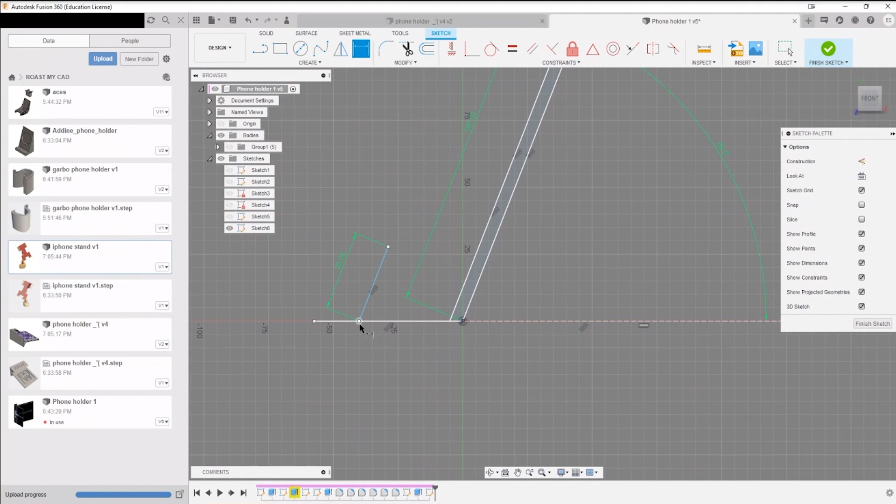Yeah, fair point. Do that with 30 mil, and then how thick is the phone? So if we've got a 5 mil gap, that's... let's go with 22 millimeters here.

Oh, that's weird. Okay, and then you can use that parallel constraint. You can just use it for days in this case. You don't even need to put any numbers around except for some distances.

And then we'll make this also 5 millimeters thick. Obviously, we're going to extend this a little bit further downwards. We'll get rid of that bit, and then we can trim off the excess over here. So yeah, we've got a nice, neat profile.

And lastly, we want to create a step that goes out to the back. So what we'll do—in fact, we can probably reconvert this line to avoid having to draw another one. You hit that line, and you can hit X to convert it between a construction line or not. That's the hotkey for it, you can hit X to do that.

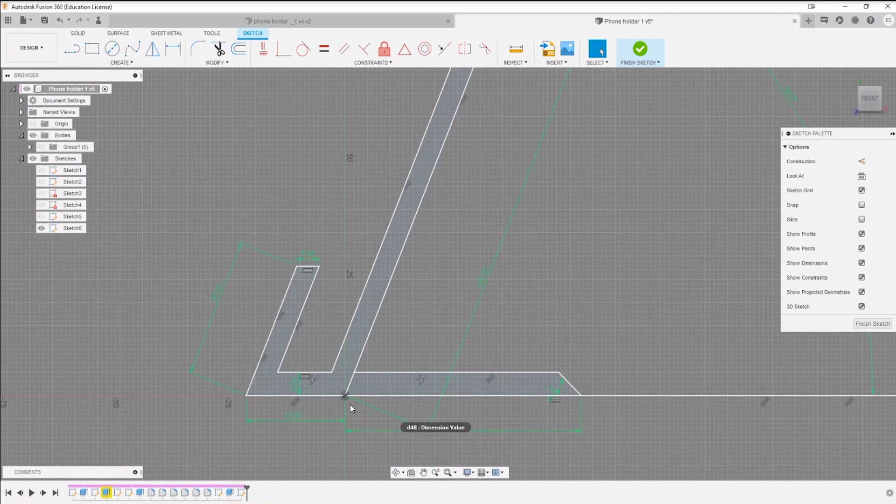All right, so that's all nicely constrained. We can trim that off. Right, so you see, I removed that one, and now it's no longer constrained in terms of distance where it's got to be. Okay, so we can do one thing.

We knew that the distance between this one and this one, we want it to be 12 millimeters. We'll stick that there, and then it's reconstrained again. So we're all good on that.

So now, no matter which one I click and try to move it, this is a fully constrained sketch. Now, remember how I mentioned you can do the fillets before or after? I'm going to show you the advantage of doing it after. When you're creating a sketch with a bunch of sharp and parallel edges, you can see how quickly it went and how easy it is, right?

So what we're going to do here—trim that a bit off. So what we're going to do here is extend this out by 17 millimeters one way. Okay, so we've got our little monolith thing there.

And then if you hit F, that's the hotkey for the fillets. Go here and create something that's about 2 millimeters. That's going to remove any of the stress concentrations at this point.

And then the cool bit is rather than doing that fillet in the sketch, you can actually make it as large as you want. You can do something really, really funky with this. Let's go with a 25 mil one. Yeah, so I think that looks pretty good.

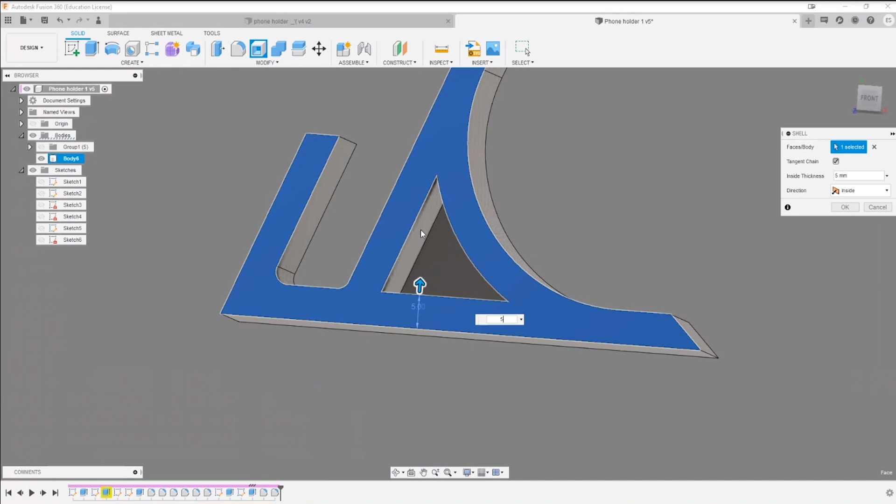Can you do that bit again? Just yeah, sure, please. So you've done this profile. If you want to create a hole over here, you can either do it in the sketch or do it after. If you know you want, if you're designing something arbitrary like this, you hit shell, select the face that you want, and then you see what it does.

So if say I had like a 1 millimeter shell, technically this would actually still print. That would be really cool. But we'll go with something a bit simpler—we hit 5 millimeters, so you want it to be 5 millimeters from each of these outer edges.

And you hit OK. Now, the thing is that you see there's a face at the end of the shell. So the shell function is basically all it's going to do is make like a tub—it's got 3 or 4 edges and then the bottom.

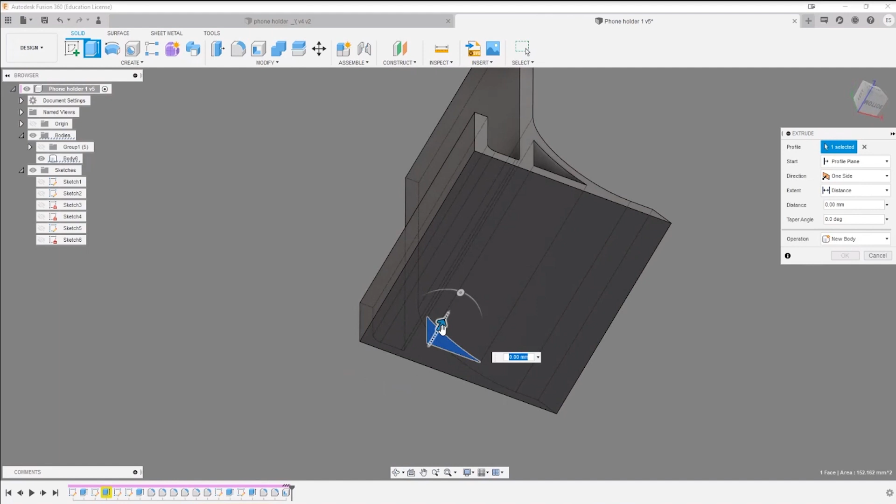Right, it's useful for making boxes and stuff like that. There you go. So you can hit extrude and then just cut it out towards the end, and now you've got a through hole.

Okay, cool. Hit F, select these three edges, hit that 2 mil, and then you've got the same kind of gap going on. All right, cool, so we'll do this. We'll keep the sharp edges there. That's fine, that's more of a design feature, especially if you're printing it on the side - you'll have more adhesion surface. So we'll go with that.

Now, because we want to do a hole for charging, what we're going to do is create a sketch directly on this surface, and I'll explain why. Just real quickly, because I think some people have to go since we're already almost an hour in. Can we just quickly critique some of the other designs after this, in case some people need to go? Yeah, absolutely. Okay, so what we can do is create this box, and inside there, pretty much we're almost done.

Is there a way to do like a center line or something? Yeah, so on that plane? Yeah, there is. So what we can do, if you hit the line function and drag it down, this gives you a midpoint - see with the triangle? So it'll just snap to it.

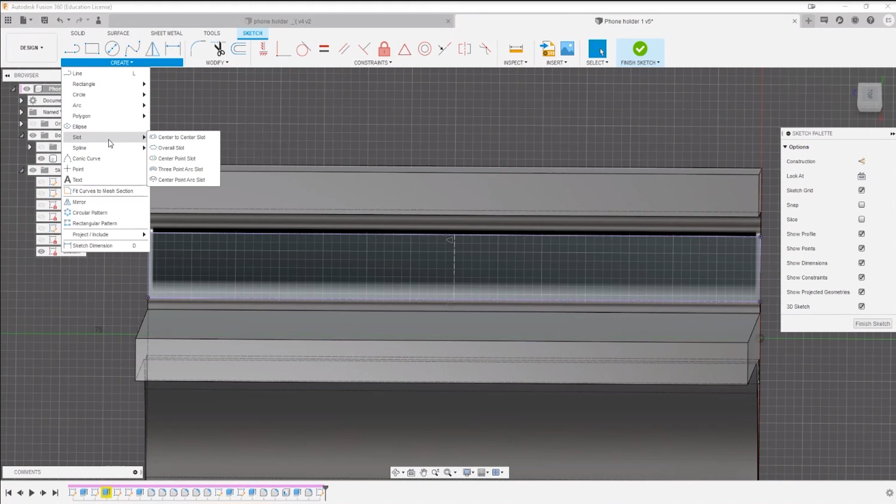And what you can do is hit X and create that as a construction line. Then you can go down to slot, center point slot. It's going to snap to the midpoint again. And you say okay, iPhone charger is about 5-6 mil, so let's go with a 4 mil, and then we can extend that out straight to the edge.

And then what we do is we just constrain the radius, and to that point as well. All right, so that's all constrained. That's all good. I'm going to show you a little trick with the extrude function as well. You select that profile, and I think you can do it... okay, it's not that one.

It'll be the sweep function. So you create the sweep function, and then the path - and the path you can select it like this. That's a sweep function. If it was winding, it would go all over the place as well. So you can do that.

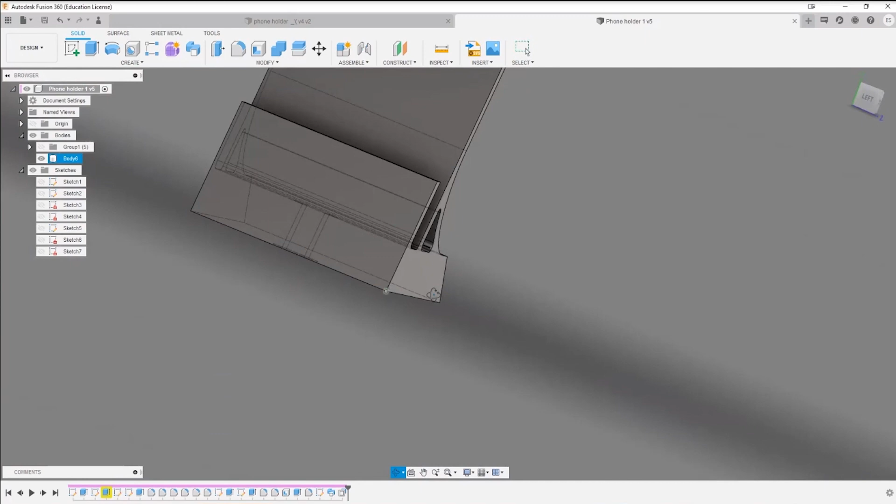Now you've got the charging hole itself. We can go to press pull. Now press pull is almost similar to extrude, but what it's going to do is move this thing out and extend the edges. We're going to bring this out another, say, 10 mil, so that we can create a hole for the charger cable to come through, all right? But we'll get around to that later. It's basically more of the same operations, but this will be one way to go about it.

We can press pull this face out another 5 mil, and we can emboss the lettering in that as well using the text, okay? So I'll just save that there. You can use that for reference, and we'll get back to that shortly. Now...

So yeah, these are some points that you can improve on. Is it better to cut into it or to cut out of it? Do you understand what I mean by that? Yeah. So if you're going to cut out, it's the same as I mentioned for this one - you could do that, but it's better to actually print the letters separately and then glue them on. That's kind of for the final product, that works best. If you want to just print it directly, then cutting in works better. If you want to go in one block like that, yeah.

All right, iPhone holder - so I'm guessing this is meant to be desk mounted. Iron Man, there we go. That's very cool, nice. Oh, that makes sense now that I see it. Yeah, I love the ketchup mustard... McDonald's. I like the ketchup mustard color scheme. All right, so definitely, I'll give him a plus for the imagination's there.

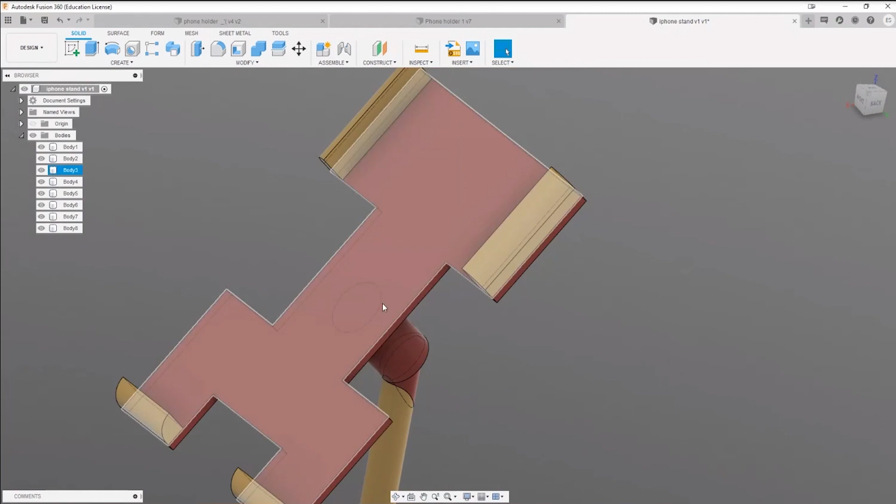So, is this going to be printed as multi-component? I could see that it would require multi-component, but I don't see how connections would be made, so this is quite tricky. I do like how you're using the edges here to maybe lighten the design up a little bit. What I would recommend is placing fillets around here so that you can avoid any stress concentration, so you don't get cracks around these areas. So you can do that.

Yeah, I wanted to talk about a carbon tube, but I didn't know how to explain it without making... Okay, gotcha. Actually, we can go to appearance so we can actually find a carbon tube here for you.

What are the cutouts in the base for? I'm trying to figure out how it mounts. Does it go inside one of those? You're gonna have balance issues otherwise. Yeah, what does that mount to? I was hoping to make a screw or something so I can, but I didn't get around to doing it. So you can screw into the base. Okay, to screw into place.

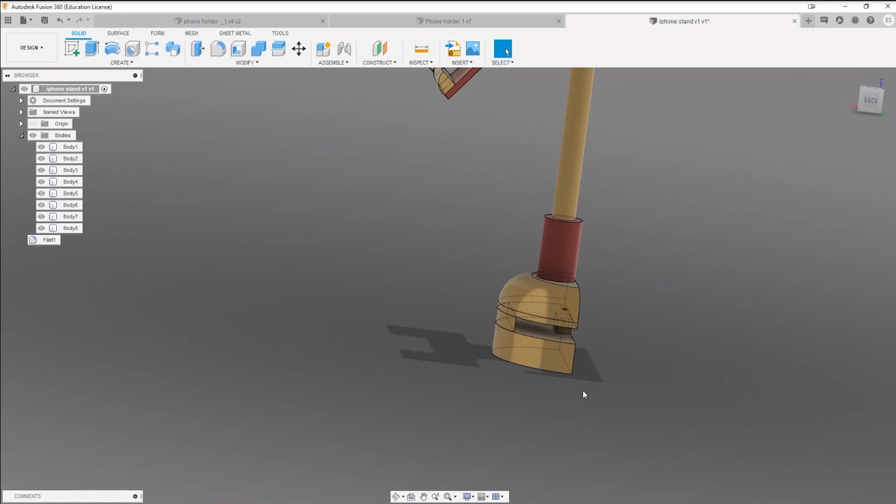So is this meant to go into like one of those, you know, in the desks you have that hole with a slot where you route your cables through? Yeah, is that what you think? Okay, right, I see. Well, definitely give it plus for using existing furniture features. I think that's considering design to be integrated or fit together with other stuff that you find.

That's quite cool, definitely. That angled joint round the back looks a little frail though. Yeah, there's definitely stuff we can improve, like putting a screw through it to improve the frailty, make it not as frail. So that way you can put a bit of a fillet. Now you can see it's less likely to look like it's going to snap off.

And the same thing - ideally you put something just going straight down, because that kind of angle, that kind of joint there, where it meets the mount itself, I think would be a bit weak. And keep in mind, you're going to have force on it when you put the phone on or when you're tapping at the screen. How much repeated stress can it take? Seems nice, but it seems a bit frail, this one.

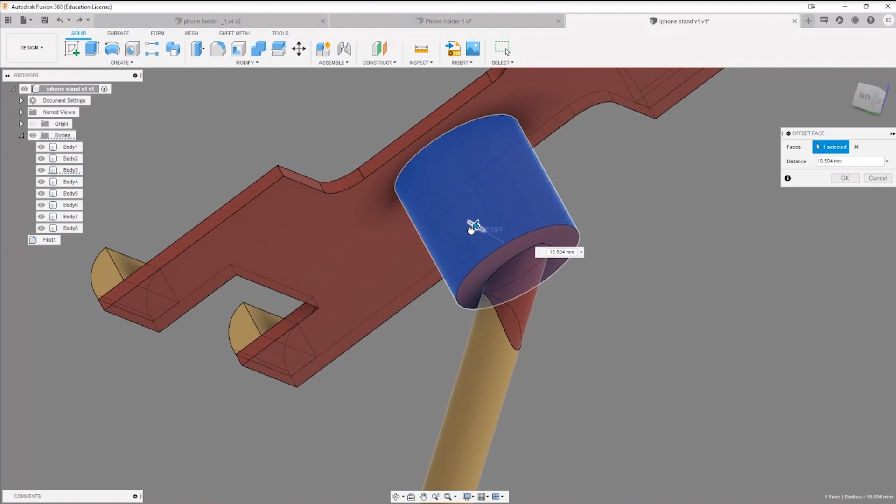Well, I mean, what we would do is maybe increase - well, thicken it, increase the diameter. So we can use the press pull function even on cylinders here, so you can increase that by a certain amount. Now, these are two different functions. So you've actually, I'm guessing you've used a sketch to kind of make that cut over there.

So what we're going to do is, let's create a construction plane. It's an interesting use of the cut to sort of align it properly - you know, if you're assembling it, you won't have it askew. It's always going to sit in that well. So what I'm going to try and do is project the surface. Now we'll go with the project function. Interesting, it's not projecting it fully. But what I want to try and do is get this curve out, just as a line here, so I can slice it after.

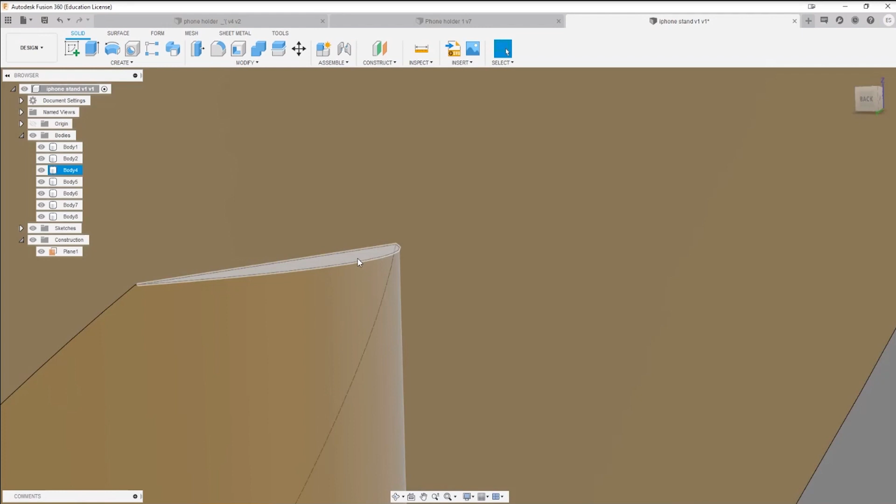So what I'm going to do is combine this one and this one together. Now the coloring, we can fix that after, that's not really an issue. Extrude up to the point - yeah, so we can extrude that straight up. See where it would cut? We just change that to join.

If you send that fillet all the way to the end of the circle, it'll be smoother. Yeah, there we go, we can do something like that. And then, I mean, I'm doing this arbitrarily, I'm not picking any specific value. So something like that. And then let's see, sketch - now, obviously, we want this to go out a bit further.

I'm gonna have to see you later. Let me know who wins the design and who we're printing thing for. Hopefully you get through them all. Yeah, yeah, no, we're almost there. Cheers, guys, thanks, bye. That's it. Okay, and then we can kind of...

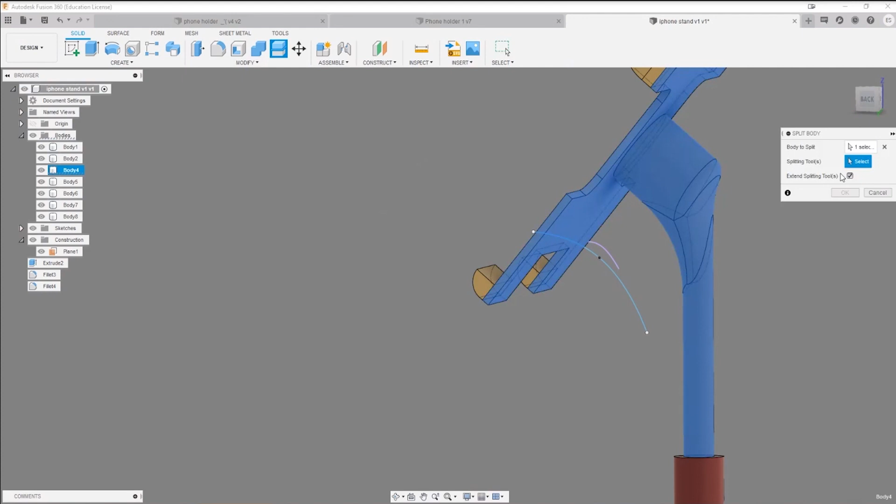Split body, splitting tools. We'll do that. Don't worry about this bit splitting to this one because you can quite easily just hit the two together since they're butted up right next to each other at infinitely small lengths.

This is where it will join, and then you can see that this is an entirely separate body. Actually, you've got these guys that are separate here as well. Go to appearance, and then yeah, cool. Oh yeah, and lastly, you can kind of get these guys there as well.

Okay, so overall quite decent. Rob, what should we go with this one? Should we go with a 6 or 7? The inspiration for the design is there, but the frailty of it sort of brings it down a bit. Yeah, I'd say we'll go with a 6 on this one. That's fine by me.

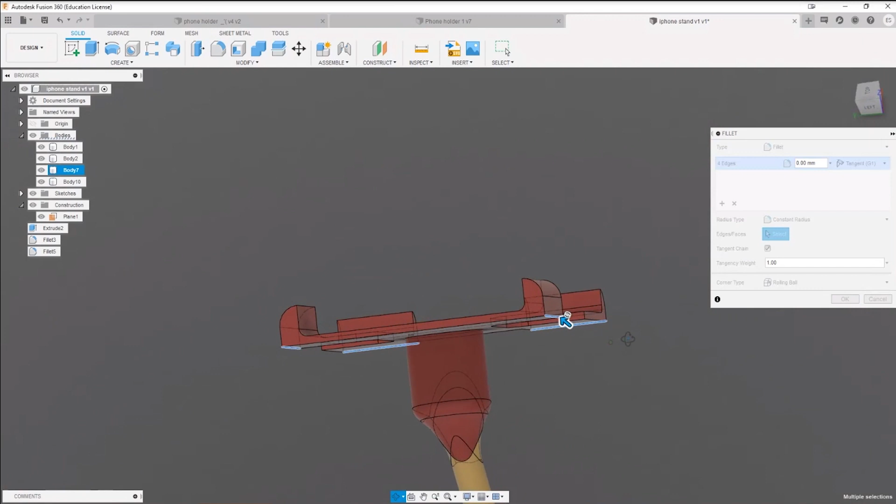We can add a couple of fillets here as well, and then also on this side again, just to clean up the design slightly. I think this is more of an aesthetics question than anything else. You don't need these sharp edges, so you can run with something like that, and that definitely looks neater. Just so you don't have sharp edges, you can use chamfers.

So bits like this, and you can put a millimeter on that, so it just clips the edges and doesn't scratch up your phone. But really, I would take a look at either gluing or putting a screw from the bottom through to here if you want to combine these two. Maybe thicken the plate a bit as well. Definitely.

Definitely. Oh right, this is joined up. I'll probably combine these as well. So I'd recommend putting fillets around most of these 90-degree parts, even if it's just a small one. That already significantly increases the strength of the joint. That's more of an engineering consideration than anything else, but that's a pretty good start.

So you've used different components, I see you've put things at different angles, so you've worked with trying to combine certain different designs. Definitely good work, we'll give you a 6 for that one.

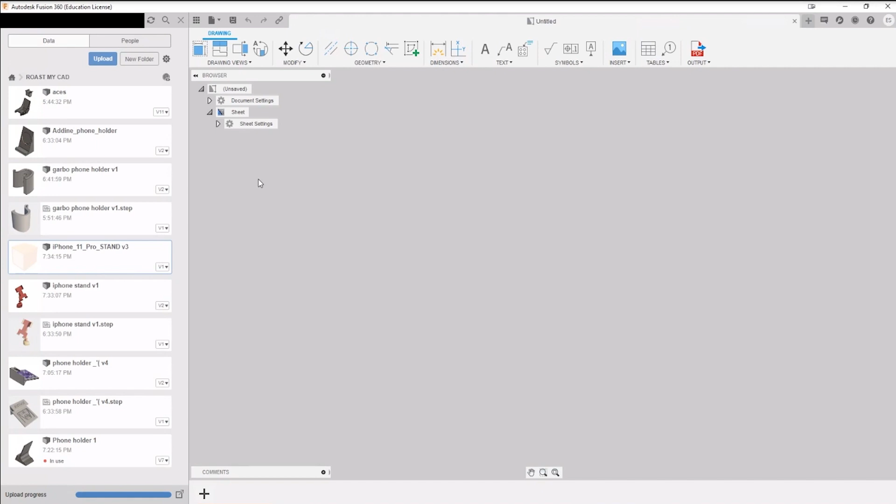Oh, that's not what we were looking for. So you can do 2D designs. Oh very nice. Oh, that's a very big base plate though.

I think that's a table. Yeah, that's a table, I just like it. All right, let's put that into a render. Yeah, let's put that into a render.

It's very clean, but it also looks very thin and frail, especially with the cutouts on the back. Hey, you know, this type of presentation maybe wants to put it into a render. So that's going to a straight 10, and we'll see how far we can push it. Very cool, very cool, okay.

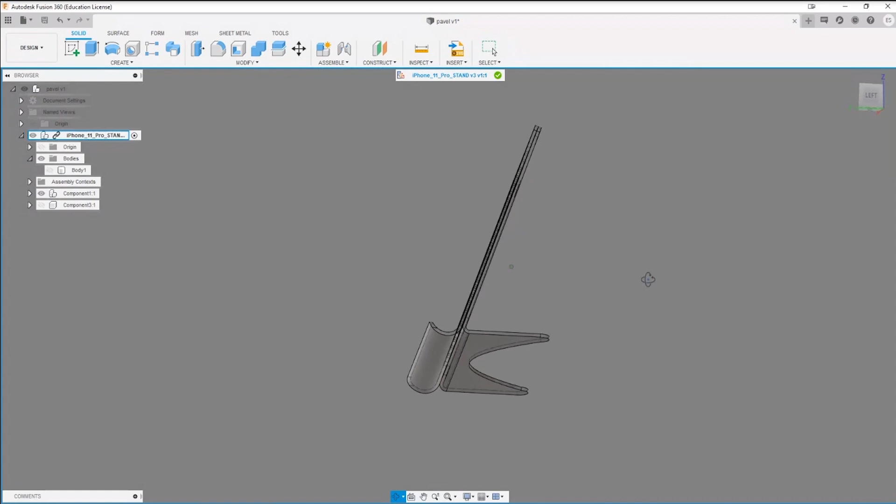Now we're gonna move back to the design. You can hide the phone in the stand. Yeah, it's... okay, that should... all right, there we go. Very cool. So now I'm guessing, okay, first couple things.

Was this part of the design, or is this more like a glitch type thing? It's part of the design. It's supposed to be like two circles in between, and then I merged them, kind of, so I couldn't... okay, all right.

Okay, I do see a couple of challenges here in terms of printing, like trying to get the honeycomb, I think, because to do something this thin. I think it's made out of two parts, though. It's two components. Yeah, so I definitely like that, and I definitely like that.

You're probably thinking about gluing or using... I was even thinking seeing it on the metal plate and then bending it. You know, right, okay, maybe it'd be easier. Yeah, if it was laser cut metal, it would make more sense. But structurally, to be 3D printed, it'd be a little weak, I think.

Yeah, I mean, it can. Rob, one millimeter is like, it's pushing it, but one millimeter, I think it can do it. We've done rocket nose cones at one millimeter thickness, so you know this.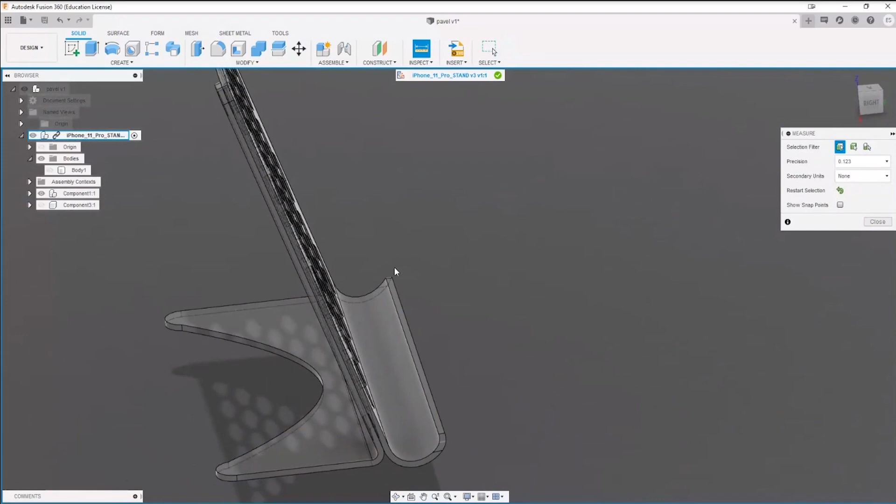Yes, but that's a cone, whereas this is just a flat piece with an entire phone's weight on it. So that's fine. He mentioned that he wants to actually explore the sheet metal options, and there is a sheet metal thing. Quite honestly, I haven't actually gone in and had a look.

So we can try that, because apparently you can convert a body to sheet metal. I'll take a look at it after. With the consideration that he wants to do it out of sheet metal, this is totally doable. Oh yeah, it's totally doable. Yeah, no, that's out of metal. Yeah, that's fine.

So I'm guessing, would you tack weld it? Would you use some kind of industrial adhesive on this point? What's the idea behind it? I don't really know, maybe. Could do M2x2 countersunks, I suppose, or something small like that.

Yeah, definitely. Overall it looks really good. You don't have any sharp edges, none of that. I really like this design. There's only maybe one qualm, which is that you've created... do you want this thing to tip back slightly, or do you want... I haven't noticed that it's not on the same level.

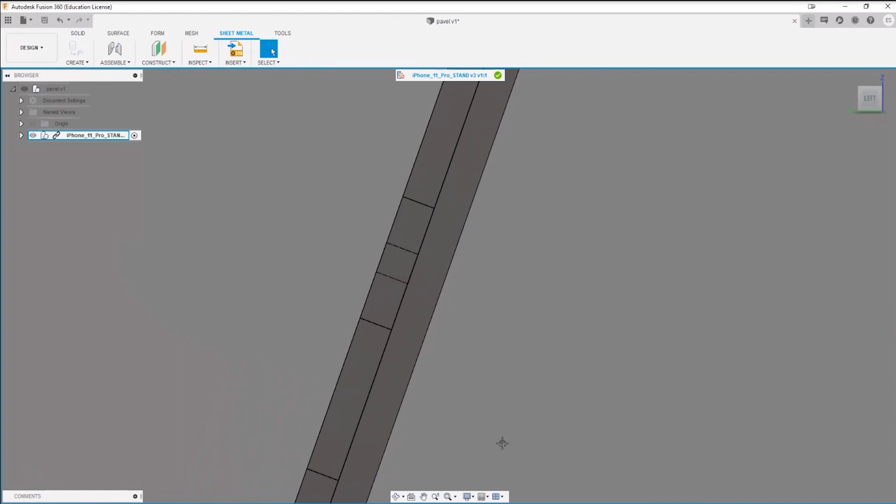Okay, so this is what I'm going to get you for, this is what I'm going to roast you for, like these things. Lack of parallelism there. I don't know if it's just me, but when you're designing for precision, you want these things to be aligned, right?

Okay, so let's take a look at what's going on here. I know this is the last submission for the day. Parts of... oh, okay. Right, so how did that happen? Because I'm thinking about how to fix it now.

Okay, let's see how we can fix this. Obviously you've created... there was a sketch done on this side. You've extruded it, and then you started punching holes from this plane. Now, what I think happened is that you created a construction plane that was at a slightly greater angle than this line. I don't know how it happened, but it was like 3 separate parts, and then I merged them together, and apparently maybe there was a glitch when I had to smooth these corners, and it turned out to be like this. I haven't noticed it before.

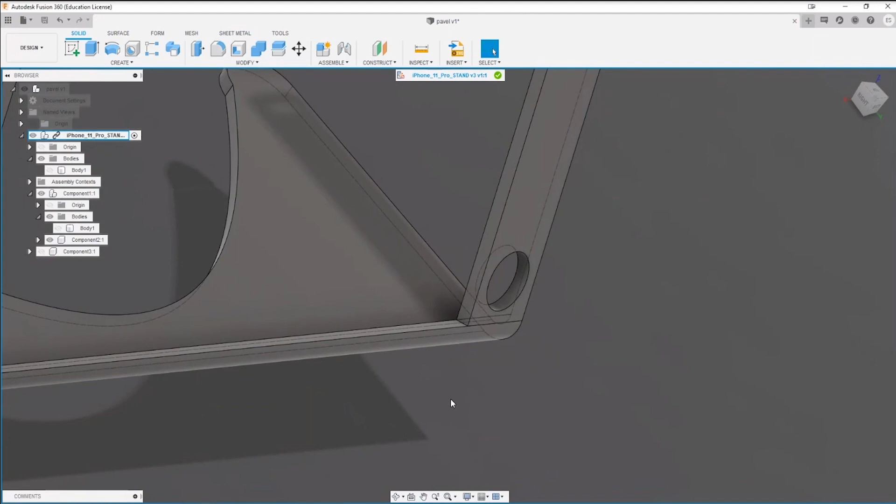I don't know, I can't seem to remove it. It's okay, right, there we go, so you need to be in the right mode. Okay, and then we can go and just fill it out from there. Oh no, it's doing the same thing. Huh. The vertical bits, are they different bodies if you combine it with the horizontal part?

0.9 millimeters, that is very thin. That's tiny. Okay, so was there a consideration for units when you created this, or was it just eyeballing it? I'll say eyeballing. Okay, I was like trying to make it... I don't know. Oh no.

I mean, it's in the right length scale. So you got about 60 millimeters, and I think my Samsung A3 is like what, 70 millimeters. So okay, no, it's in the right scale. That's fine. I was just checking. So there's one thing that I'd recommend.

There's this inspect tool, or the hotkey, you can use I for that. You can check these things, right? So if you would have checked this side, you would have noticed, okay, 0.9, that's probably pushing it in terms of thickness. So you might have some issues there, but there's ways that we can fix that. So what I'm gonna do, I know there's 0.9 from that side. What we're gonna try to do to fix this, this is 6 millimeters.

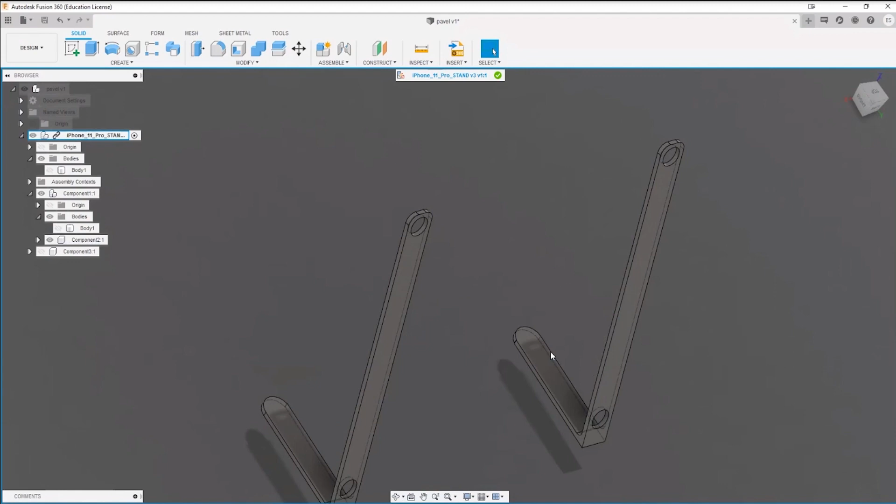What we're going to do is get rid of that. I'm going to create a sketch on this plane. Right, so now we're working in this plane over here, and what we're going to do is just create a line. How far do we want to make that go, 6 millimeters as well? Yeah, let's make it go 6 mil. So make sure that's all constrained. We can reference the physical body geometry there, so we can see that's constrained between these two entities.

Okay, so we'll finish that sketch. And then what we'll do is we'll just extrude that out. We'll join it. Okay, so now I know this looks like a big ugly block here, but we can fix that as well. So we'll split this body.

It's unhandled. Okay, strange.

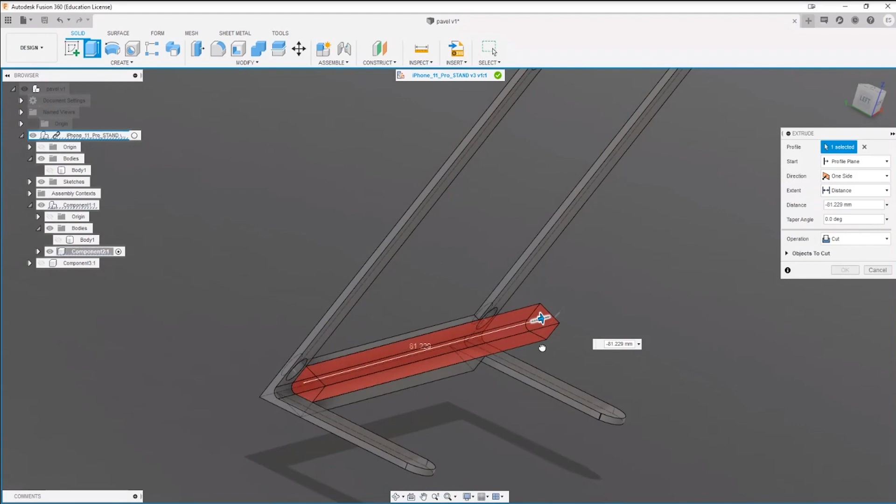Actually, you know what? We can just extrude that through. That's a much easier way of doing that. And then shave that off as well. Yeah, see where I'm going with this?

Now you see, technically this line, yeah, that shouldn't be there. Okay, so what we can try to do is we just delete that. Sometimes there's a glitch in terms of how it recomputes the surface. So, but when you realize that technically this is one entire surface here, that line, it shouldn't be there, and you could quite easily just select one and then delete it, see what it does. So that's another way to debug the surface.

Now we can just insert the fillets back to where they were. Let's see. The radius on that is 1.95. Sorry, that's 1 millimeter. Okay, yeah, that's close enough as far as this representation is concerned.

Actually, no. Actually, that wouldn't be correct, because what you've got is that I just completely eyeballed that one. You don't want to be doing that. What we're going to do, we're going to create an arc. Let's go with, actually no, let's go with a 2-tangent circle.

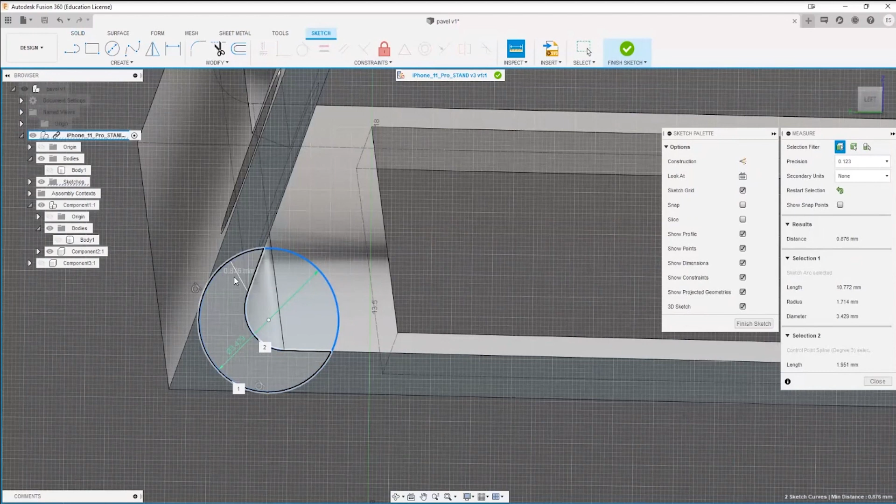Know that the distance between, so what we're trying to do is put this exactly at 1 millimeter, right? Yeah, okay, so we can use the offset tool. So the offset tool is this one right here. All it's going to do is move an arc that's 1 millimeter out from that existing body. So we're using this curve as a reference now for you.

Right, and then if we go back into the sketch, we can close that profile. And then cut it out, and then we should be able to delete these, because these are like infinitely thin now in theory. So yeah, we've got that. That's perfectly aligned. There shouldn't be a step in here anywhere. No. Okay.

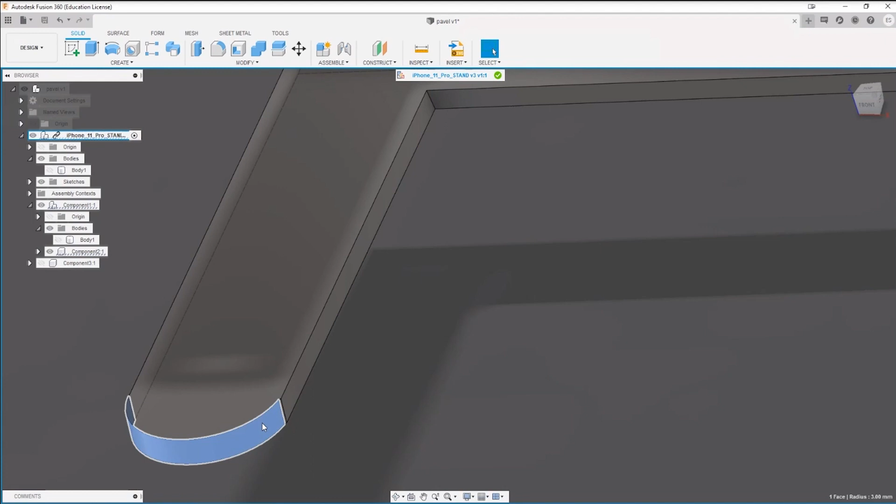Cool. And finally, we'll just put the fillets back in this position, and we can see that there was an arc running back here. So what we will do is, so we've got that arc back, because I believe that's what you initially specified, and then we can go back to the fillet tool and restore these corners. We'll go with 3 millimeters. Yeah, so now you can see that these are completely flush. You see?

Okay, so that's the first component. And the second component, I mean, that looks completely fine. So I don't really have any issues. So we can finally, we've gotten rid of that weird corner over there.

Actually, I'm guessing you wanted these to be lower than the hexagon. So we can hit the press pull, use Q as a hotkey there. And this will just go down to 2 mil. Or you could just extrude it down to a given point and then set the point as the base, the lowest point of the hexagon. Yeah, but he's got a gap here, so I was thinking give him a gap there.

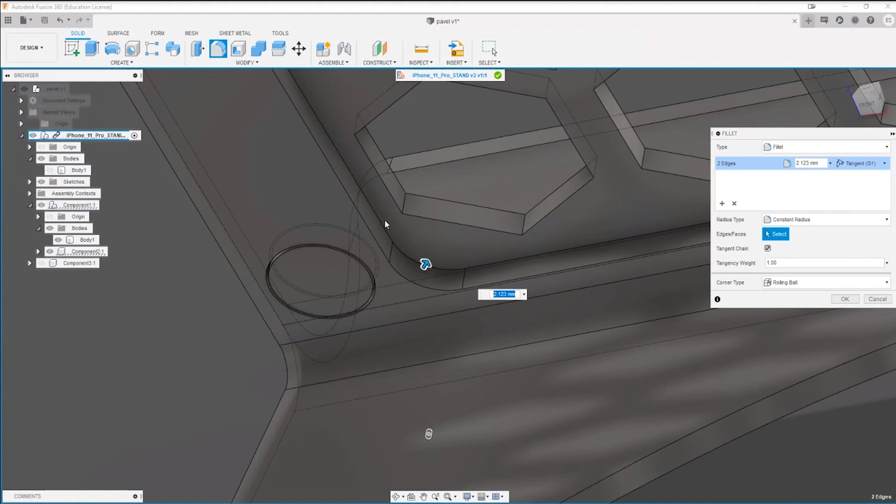If you want to, I mean, what you could do is when you hit extrude, you can go start, this is your profile plane, and then extend. So you can go to object, and what you can do is you can actually select that as a distance, the vertex. Yeah, and then your offset, you can go. Sorry, let me just actually measure the distance. So I'm going to show you how to exactly, how to recompute everything. If that's 1 millimeter, then if we do the same thing, distance to object. Okay, certain distance. Whoa. Can we just go down -1? Yeah. Okay, there we are.

And then we just put those 2 fillets back where they were, so they're no longer covering the hexagon. That should be fine. All right.

There's another thing that you could do that would be quite cool. You can create a couple of gaps here using the shell function. So the shell function, what it's going to do, it's almost like creating a box, right? You see what it's doing? It's creating a hole kind of in this position. Actually, it's done something really strange here.

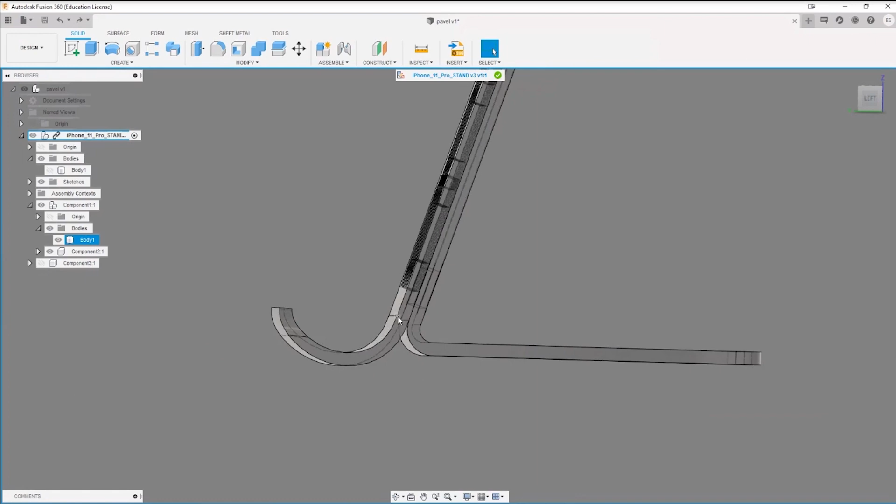My last suggestion would be to fix this, but I think you've gotten a good grasp of how to do the rest of the stuff. If you wanted to fix it, you would, I suppose, just create a sketch onto here, and then create a new. What you can do, in fact, is project this geometry into the sketch. So now it's like a usable line.

You can actually remove the previous component there. You've got a usable line, and you can extend this out. Now you know this wants to be directly collinear with this one. So you use the collinear constraint, hit that, and then hit that one, right? So now you know this line is your new baseline.

And then what you can do is redraw a curve. Let's go with the circle, and then a 2 tangent. Select that one, select that one, and then go with whichever diameter you want. Offset it, go -1 millimeter. Okay, now.

And then you convert that to a construction line, so that's no longer a carrying line. It's not going to affect anything, it's not going to be a profile for anything when you're extruding. And what you can do from here, in fact, is...

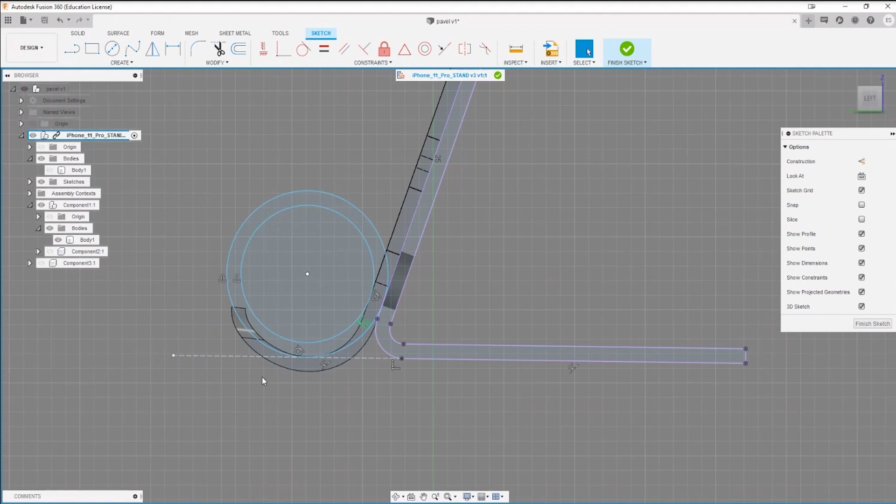Okay, so definitely, I love the design. I'd probably hack off some points for accuracy. So looking at accuracy, should we go with like an 8.5, 9?

Yeah, that seems good. Consideration for different material - sheet metal, trying to CNC. We don't actually see a lot of people wanting to CNC something, normally it's just 3D print. So definitely, if you want to spend time and actually take a look at how to create a solid body into sheet metal, that would be quite beneficial, because we're always happy to encourage multi-material, multi-component manufacturing.

So not just 3D printing, but 3D printing, laser cutting, CNC, using carbon tubes or any kind of extruded other materials that you can get in abundance and for very cheap, and piecing it all together, because that really defines efficient design and manufacturing.

Okay, all right. I think we've gone for quite a while today, but that's it. So got to pick a winner. Yeah, for a winner, you know what?

I like that engraved one. Yeah, this one right here. So yeah, that's the one. Congratulations, you are the winner for today.

Yay! Mainly for trying to actually import SVGs. In fact, because you can import a canvas as well into every single different plane, like an image, if you ever want to trace something - in fact that's exactly what I've done for this seat, right? So I said I wanted to CAD something up.

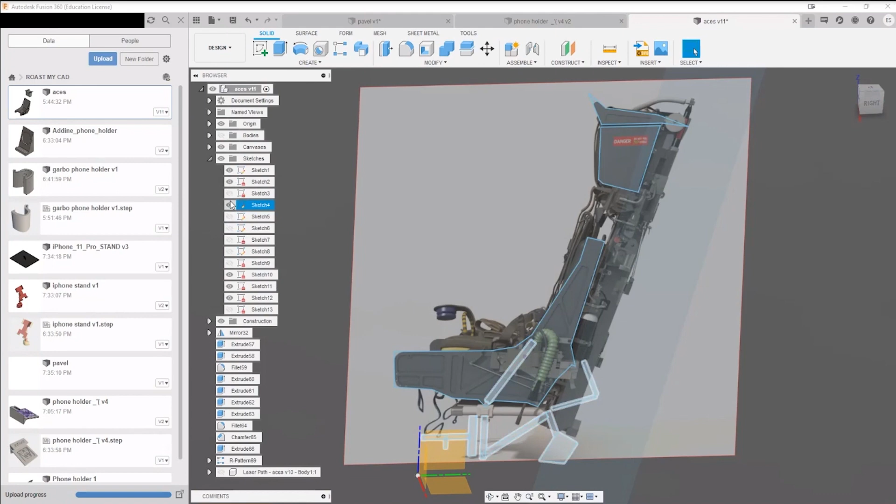So definitely nice work on doing that. You've tried to do something with surfaces, you've combined different surfaces, you got some lettering in there, and the actual design itself was quite sound. So I can see this being quite functional.

You can check something for accuracy and tolerancing. So yeah, 10.6 - that's enough to fit a phone in. So no, very good, very good. Congratulations. Thank you. All right.

So what I'm gonna do is I'm gonna actually get these splines done. In fact, now that you've seen how to do it, you can do that yourself. You can submit the redesign, and we'll get it printed out and sent over to you.

Oh great, can you, since you already did some of it, save it and then re-upload it so I can? Yeah, you know what, since I've only got a couple of contours, it'll take me 5 minutes. I'll just finish it up and print it off and get it over to you. Oh, thank you.

Yeah, fantastic. Ben and I will sort out how to post this or whatever if you're on campus. I'm not on campus. Not on campus? All right, we'll figure out a way to post it to you then. I'm like 2 hours away from uni.